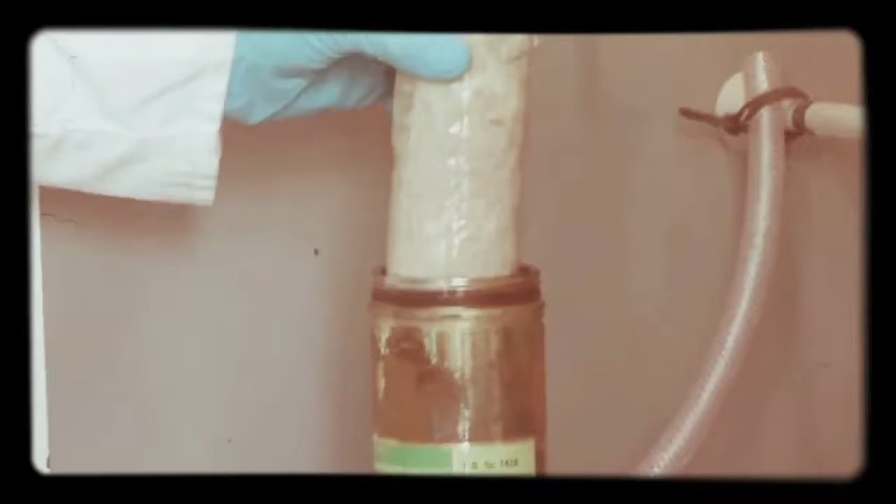It's stored under oil to stop air or moisture getting on it. It reacts very quickly with air and also with water. The hydroxide forms a white crust on the outside, fizzing as it generates lots of hydrogen gas. Now the heat from the reaction is burning away all of that hydrogen.

You don't want to build a reactor out of stuff that wants to burn or react with anything. You want whatever you've made it out of to be at the rock bottom of stability. I don't want there to be a step further down that is chemically favorable, because that's how things burn.

The fast breeder guys use sodium because it doesn't slow down the neutrons. Everybody who was pushing plutonium said, we want a fast reactor. That's the only way to do it.

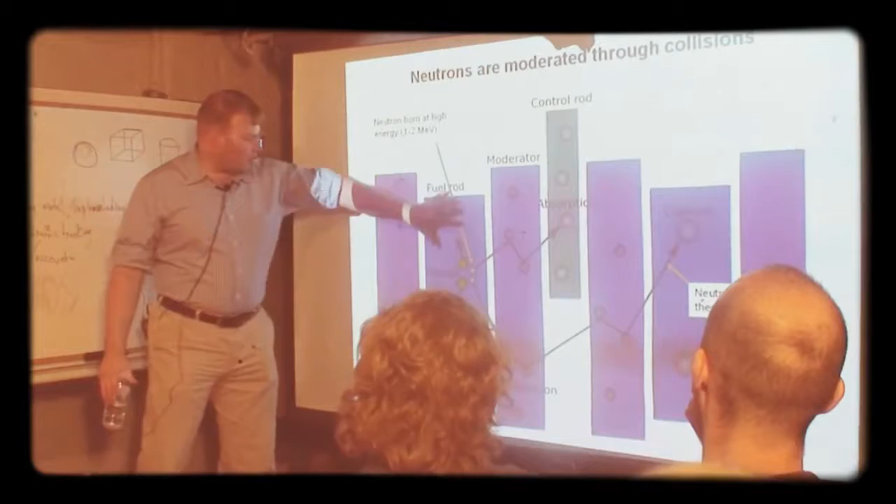The notion of the public being intimately involved in very complicated technical issues, which went way beyond the competence of any member of the public, it just didn't seem that that was the right way to do it. And I think the basic question is, can modern intrusive technology and liberal democracy coexist?

The decision of what is acceptable is not something that we technologists can make. It's something that the public makes.

I think a lot of people were daunted by nuclear energy. There's no way we could learn this stuff. I don't want to do that class, it's going to be too hard.

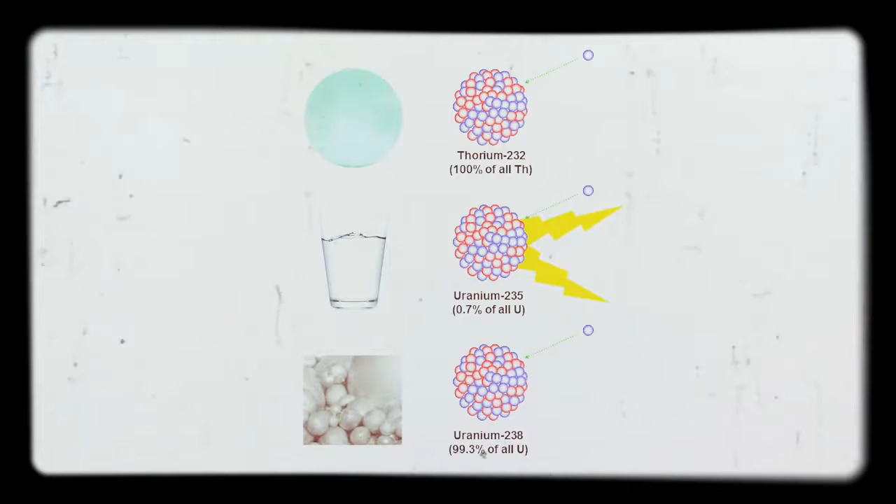These three coolants are generally associated with three different nuclear fuels. Liquid sodium-cooled reactors are fueled by natural uranium. Water-cooled reactors are fueled by enriched uranium. And molten salt reactors can be fueled by thorium.

The reactors deployed commercially around the world are water-cooled. Today, we use water to cool reactors because we use enriched uranium as fuel. And we use enriched uranium as fuel in today's reactors because they are water-cooled.

Despite sodium's reactivity with both air and water, it is in some respects a safer coolant than water. This is because our enriched uranium-fueled, water-cooled reactors pressurize the water to raise its boiling point and drive steam turbines more efficiently. If we didn't pressurize the water, we'd be using much more uranium and producing much more nuclear waste per watt of energy.

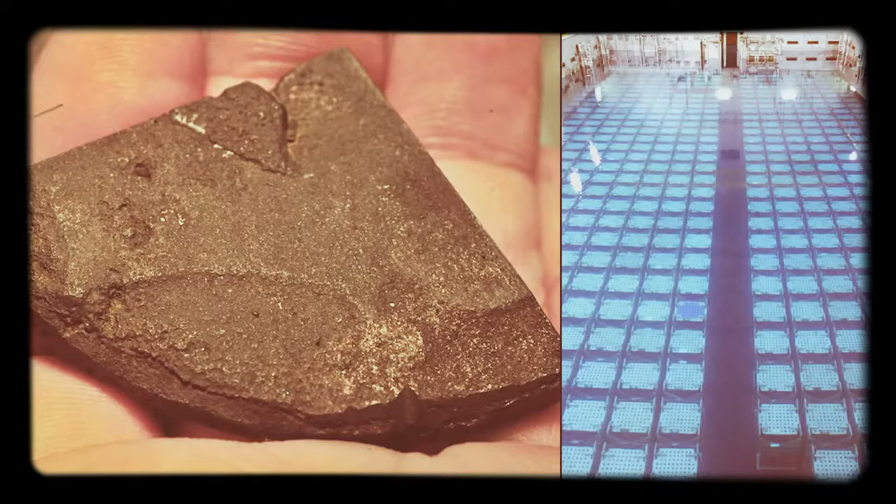In addition to being a thorium guru, Weinberg was also the original inventor of the pressurized water reactor. So it was a little bit of a tricky thing to have the inventor of the light water reactor advocating for something very, very different.

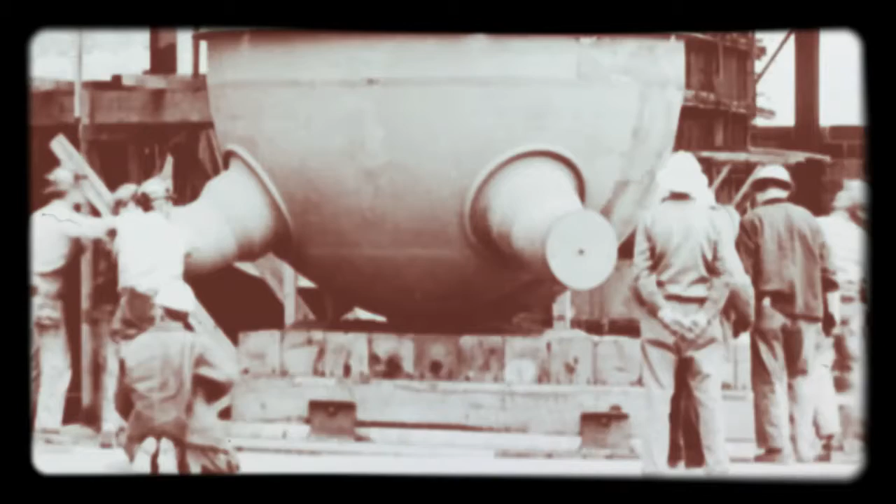As long as the reactor was as small as the submarine intermediate reactor, which was only 60 megawatts, then the containment shell was absolute. It was safe. But when you went to 1,000 megawatt reactors, you could not guarantee this.

Weinberg never really was crazy about the light water reactor. He didn't like the fact that it had to run at really high pressure. He figured there would be an accident someday where you were not able to maintain the pressure or keep cooling it.

In some very remote situation, conceive of the containment being breached by this molten mass. A small valve in this collection of pipes is stuck in an open position, letting steam and water escape from the reactor core. It's critical that the uranium fuel rods that make up the reactor core stay underwater.

A yellow tag covers an important light. They're convinced that the core is covered by water. A huge bubble of hydrogen is forming right inside the reactor vessel.

The hydrogen was generated by reaction between steam and the zirconium fuel cladding. And then that hydrogen ignited from some sparks. Boom! The whole building shudders. I mean, the whole plant building, boom!

And somebody says, what was that? An explosion had taken place inside the containment building, and those gaseous fission products came out and were released to the environment.

Pregnant women and preschool-aged children leave the area within a 5-mile radius. It took a month to shut the reactor down, but finally, Unit 2 was stone cold dead.

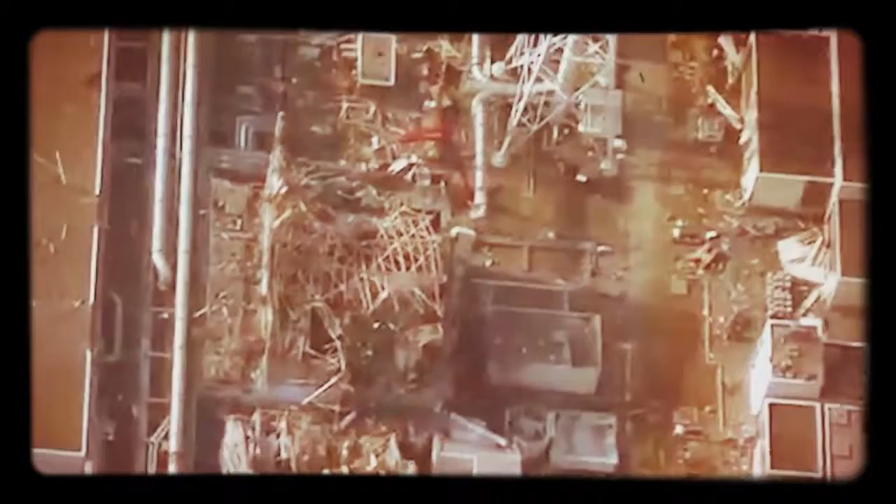The Japanese Prime Minister ordered a desperate tactic: dumping water on the spent fuel pools from the air. Tungsten plates were bolted to the helicopter to protect the pilots from gamma rays, but the wind was too strong for accurate aiming. The Japanese government ordered a team of Tokyo firefighters to park a truck by the sea to suck up water, then lay 800 yards of hose and leave it spraying into the fuel pool.

The route was blocked by tsunami debris. The firefighters now had to lay the hose by hand. After an hour on site, the hoses were finally connected.

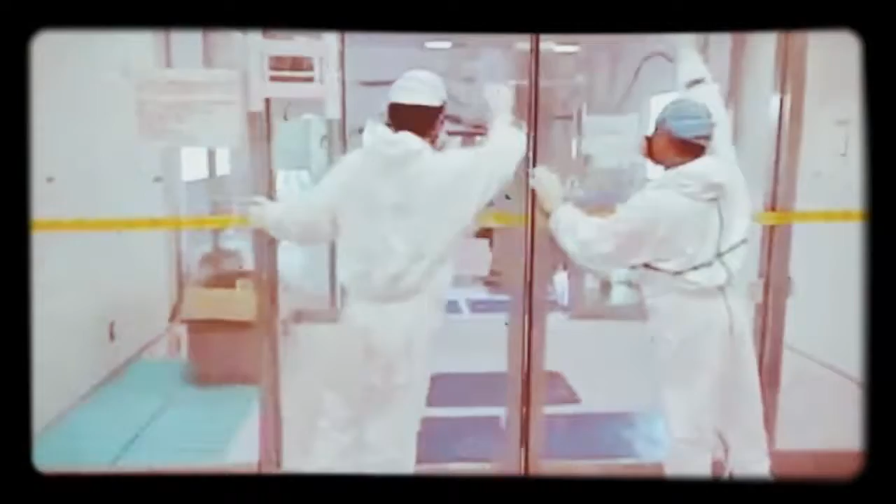Radiation levels at the plant began to fall. The hundreds of workers who'd been on standby headed into the plant to lay miles of pipes. A steady flow of water at last started to cool the reactor cores. The workers in the control center began to feel hope.

3 Mile Island, Chernobyl, and Fukushima were all radically different incidents. What was similar at all three was how poorly water performed as a coolant when things started to go wrong. This is not to say that water coolant caused these accidents to occur—it did not. All three accidents were initiated by different combinations of design and operator error. It was water coolant which allowed these errors to multiply and ultimately result in the escape of radioactive isotopes into the environment.

At 3 Mile Island, water couldn't be pumped into the core because some of the coolant water had vaporized into steam. The increased pressure forced coolant water back out, contributing to a partial meltdown. At Chernobyl, the insertion of poorly designed control rods caused core temperature to skyrocket. The boiling point of the pressurized water coolant was passed and it flashed to steam. It was a steam explosion which tore the 2,000-ton lid off the reactor casing and shot it up through the roof of the building. At Fukushima, loss of power to the pumps allowed coolant water to get hotter and hotter until it boiled away.

These three accidents illustrate the need for a coolant with a higher boiling point than water. It's only got 100 degrees of liquid range, 0 to 100 C. That's not particularly impressive. So to jack up water's liquid range, you have to put it under pressure, because that's the only way to get water to go up to 300 degrees C without turning into steam.

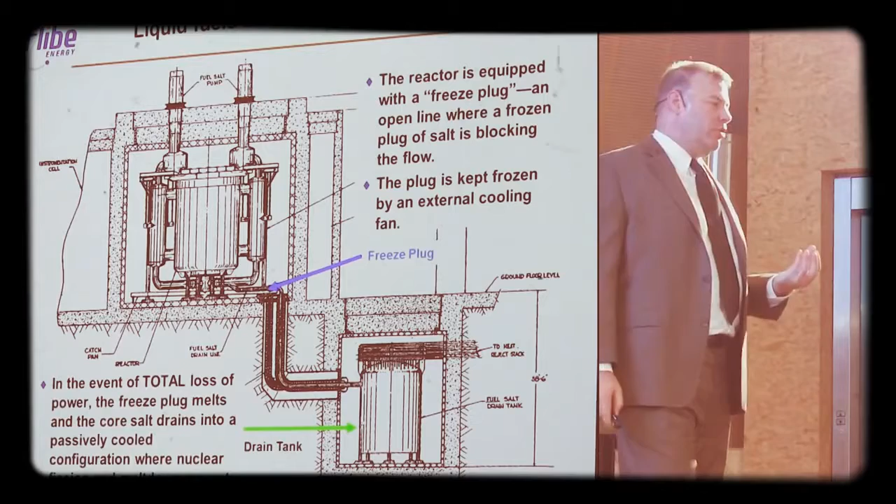And to keep the port plugged, they had a blower that would blow cool gas over it, so there was a little plug of frozen salt there. Well, if the power went out, the blower turned off, and the heat would melt the frozen plug, and the fuel drained into this drain tank. The difference between the drain tank and the reactor vessel was: the reactor vessel was not meant to lose any thermal energy. The only place you wanted to lose thermal energy was to give it up in the primary heat exchanger.

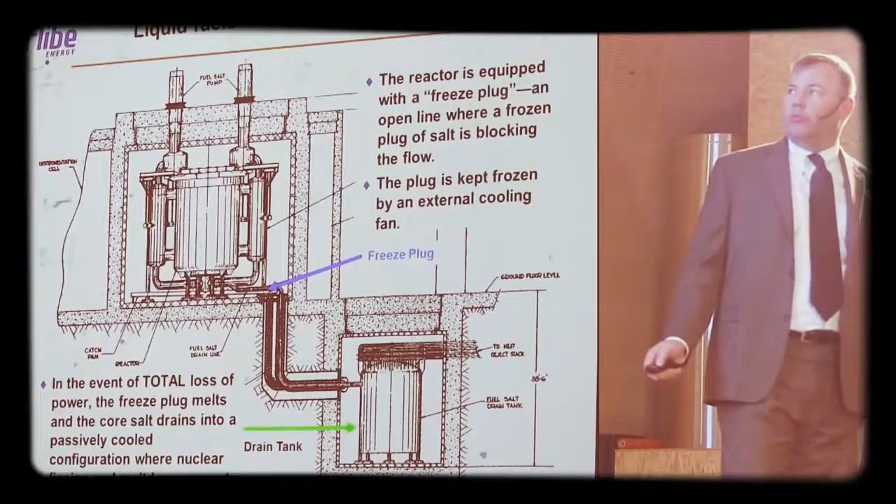The drain tank, on the other hand, is designed to maximize the rejection of thermal energy to the environment. I'm a mechanical engineer, so all we ever talked about in school was how to add heat to things and take heat out of things. One of the hard things about designing a nuclear reactor is designing it to not lose any heat while you're running it, because you don't want to lose a bunch of heat in normal operation, but then to turn around and try to keep it cool if something goes wrong. So there are two conflicting things.

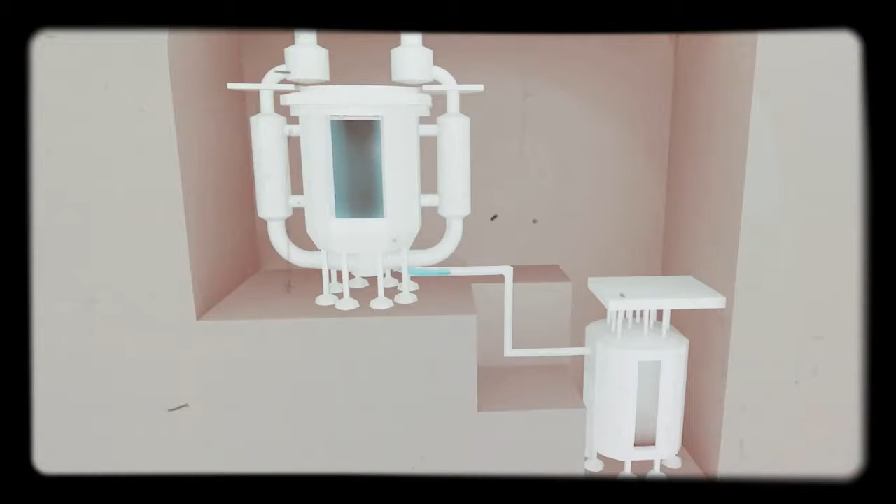The great thing about liquid fluoride reactors is you can design them completely separately. You can say, here's my reactor and it's designed to make heat, and here's my drain tank and it's designed to cool in all situations. Better than having what's called deterministic safety systems or engineered safety systems is to have inherent safety systems that will work 100% of the time, because it is based on the laws of physics. A cooling system that is completely passive, that does not rely at all on electrical power to manage the decay heat after shutdown.

And it's always going to work because gravity is always going to be turned on. Because it was not operating at high pressure, this is a system that was tolerant of extraordinary damage. If you wanted to go in and jam a projectile through the side of the reactor, the salt would still just drain out, now into a pan, but the pan would run back into the drain tanks. Now, in that situation, you're not going to turn the thing right back on again, but it's not going to lead to a dangerous release of radioactivity.

At 3 Mile Island, coolant water which had boiled into steam reacted with the fuel rod cladding to produce hydrogen gas. This led to several explosions. At Fukushima, steam also reacted with the fuel rod cladding to produce hydrogen gas. This led to hydrogen gas explosions at reactors 1, 3, and 4.

Let me diss on water a few more times. It's a covalently bonded substance. The oxygen has a covalent bond with two hydrogens. Well, neither one of those bonds is strong enough to survive getting smacked around by a gamma or a neutron. And sure enough, they knock the hydrogens clean off.

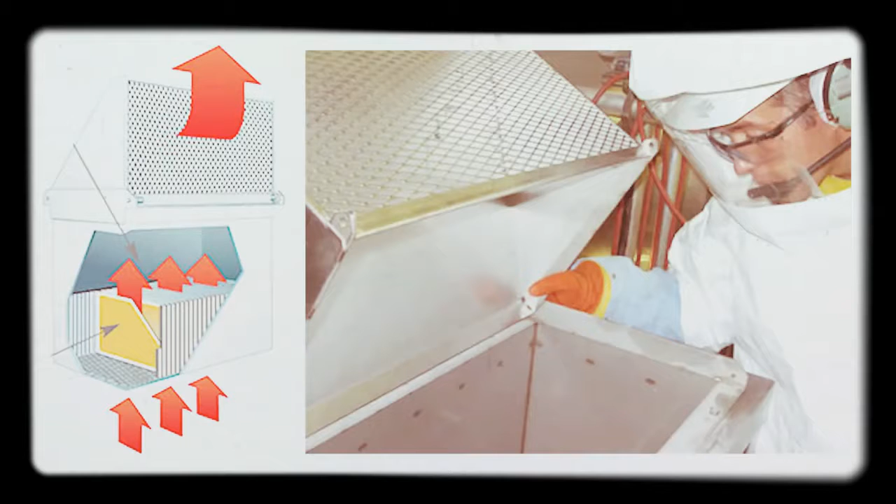In a water-cooled reactor, you have a system called a recombiner that takes the hydrogen gas and oxygen gas that's always being created from the nuclear reaction and puts them back together. It's a great system as long as it's operating and the system is pumping. At Fukushima Daiichi, the problem was the pumping power stopped. H2O can also react with the fuel cladding to release hydrogen and damage the cladding, releasing radioactive isotopes.

These two accidents illustrate the need for a coolant which is more chemically stable than H2O. A nuclear reactor is a rough place for normal matter.

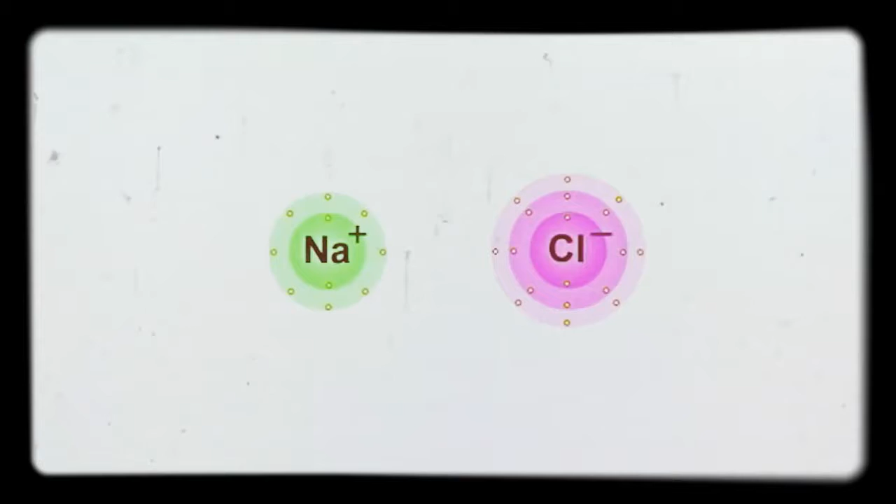The nice thing about a salt is it's formed from a positive ion and a negative ion. Like sodium's positively charged and chlorine's negatively charged, and they go, we're not really going to bond, we're just going to kind of associate one with another. And that's what's called an ionic bond. You're kind of friends - Facebook friends.

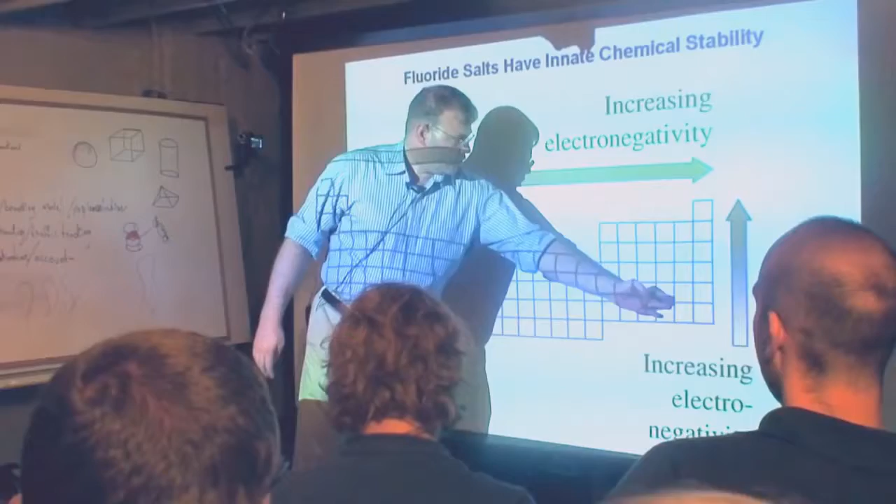This turns out to be a really good thing for a reactor because a reactor is going to take those guys and smack them all over the place with gammas and neutrons and everything. The good news is they don't really care who they're particularly next to. As long as there's an equal number of positive ions and negative ions, the big picture is happy. A salt is composed of the stuff in the halogens column, and the stuff in the alkalis and alkaline earths columns.

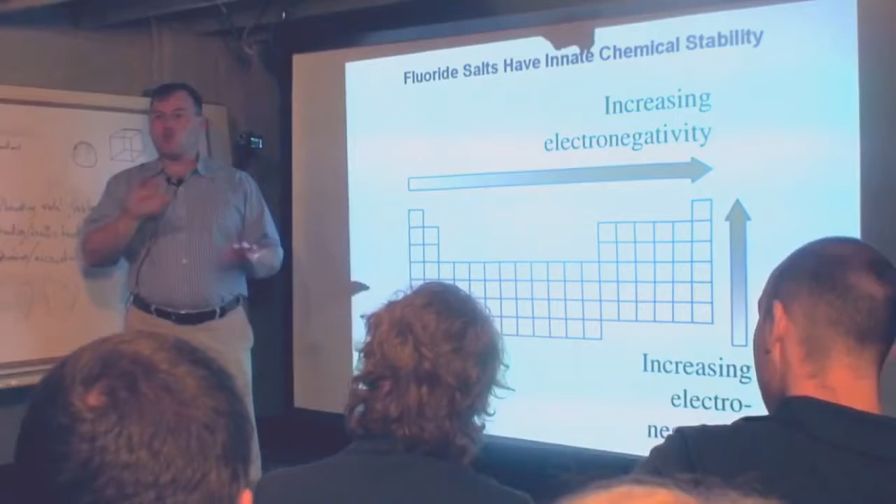Fluorine is so reactive with everything, but once it's made a salt, a fluoride, then it's incredibly chemically stable and non-reactive. Sometimes people go, oh, you're working on liquid fluorine reactors. No, I am not working on liquid fluorine reactors. We're working on fluoride reactors, and there's a big difference between those two. One is going to explode, the other one is super duper stable.

I see moving to molten salt fueled reactor technology as a way to get rid of all the stored energy term problems that we look at in today's reactors, whether it's pressure, chemical reactivity, or even the potential of the fission products in the fuel itself to be released.

In fluoride fuel, which is what we would use in a molten salt reactor, those fission products are bound up very tightly in salts. Strontium and cesium are both bound up in very, very stable fluoride salts. Cesium fluoride, very stable salt. Strontium difluoride, another very stable salt.

In light water reactors, cesium is volatile in the chemical state of the oxide fuel, and that's been one of the concerns about cesium release. Cesium would not release from a fluoride reactor at all.

So why are we using water to cool today's reactors? If water coolant prohibits us from completely consuming uranium or thorium as fuel, why did we start using it in the first place? The association between different nuclear fuels and their respective coolants is because some nuclear fuel requires slow neutrons and some nuclear fuel requires fast.

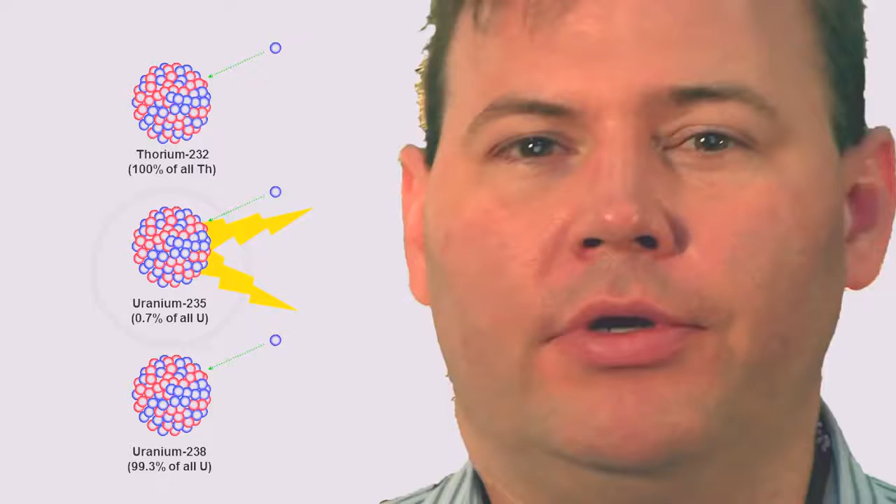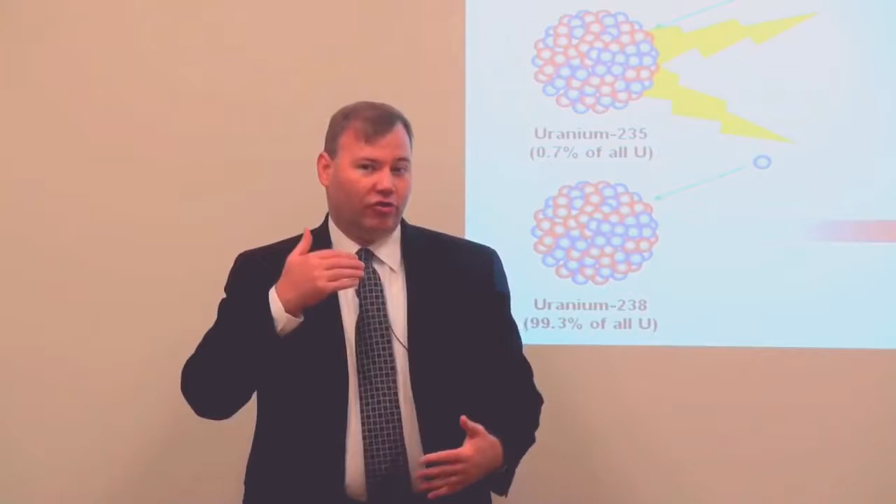There really were three options for nuclear energy at the dawn of the nuclear era. Only one of the materials in nature is naturally fissile, and that's uranium-235, which is a very small amount of natural uranium, about 0.7%. This was the form of uranium that could be utilized directly in a nuclear reactor. Most of the uranium was uranium-238. This had to be transformed into another nuclear fuel called plutonium before it could be used.

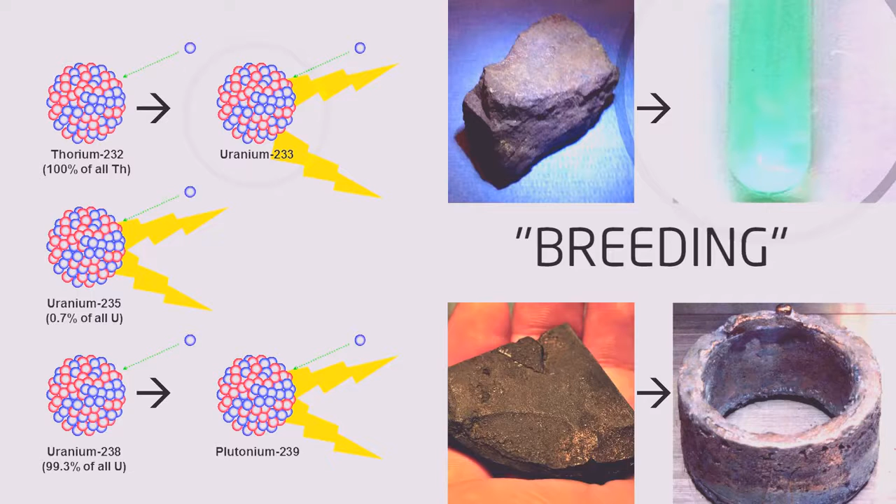And then there was thorium. In a similar manner to uranium-238, it also had to be transformed into another nuclear fuel, uranium-233, before it could be used in a reactor.

Well, this was wartime. Their plan was to make bombs. They took natural uranium and separated those two isotopes. They would highly enrich uranium-235 from less than 1% up to 90+%. It took big factories - it's very difficult to do isotopic enrichment. But this is how they made the uranium for the first nuclear weapon used in war.

This was the bomb at Hiroshima. It was called Little Boy. Then they said, well, what can we do with all this junk uranium-238, the 99.3% of it?

You could expose it to neutrons, and you could make it into plutonium. Now, plutonium is a different chemical element than uranium, so they can be chemically separated. Uranium-235 and uranium-238 are chemically identical - there's no chemical difference between them. But there is a chemical difference between plutonium and uranium, so it was a lot easier to do a chemical separation of the plutonium you'd made, and that's how they made the Nagasaki bomb, which was called Fat Man.

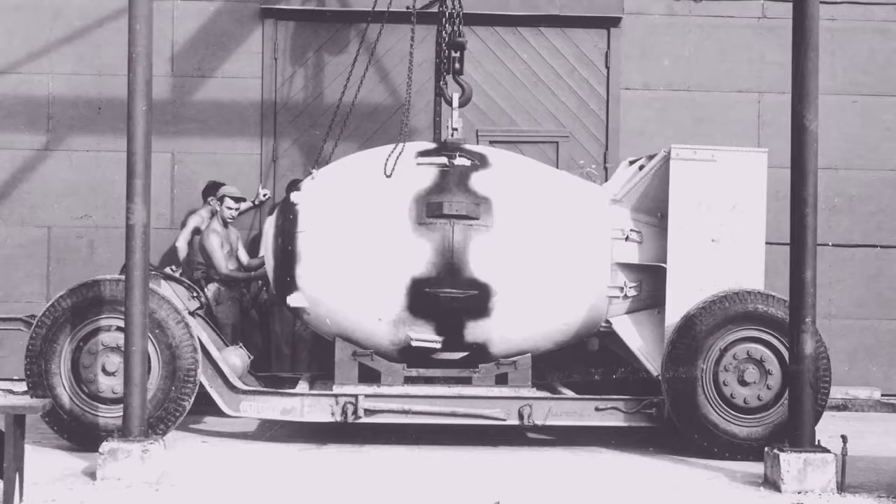Okay, well maybe we can do the same thing with thorium. Maybe we can expose it to neutrons and make it into uranium-233. Uranium will be chemically separable from thorium, and we can go make a bomb out of it, right? Sounds great. It's a really bad idea, because as you made the uranium-233, you were always making uranium-232. You didn't make a lot of it, just a little bit of it.

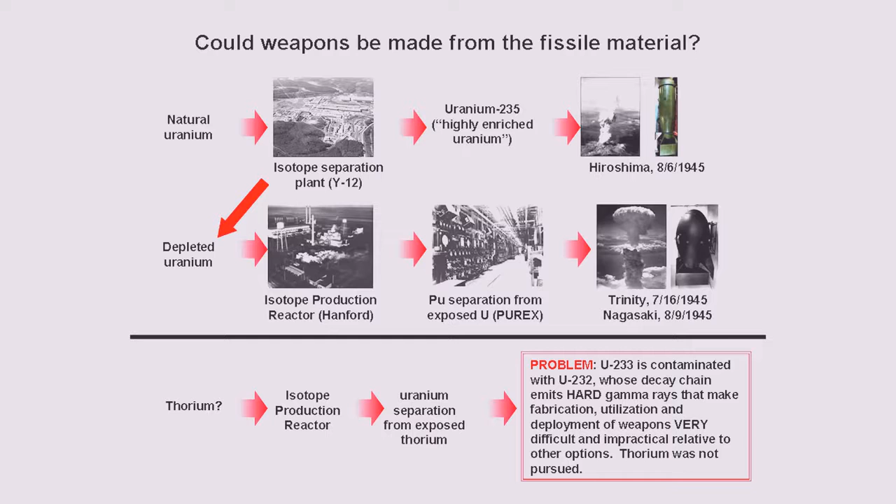But uranium-232 is much more radioactive than uranium-233. Here's the decay chain that uranium-232 is on: it jumps down to bismuth-212 and thallium-208, and these two decay products put out very strong gamma rays. These gamma rays are super bad news if you want to build a practical nuclear device, because they tell everybody where the stuff is and they kill you. So quickly they decided: we can work with uranium-235, that seems okay. We can work with plutonium, that seems okay. But this uranium-233 stuff, that's bad news for making a nuclear weapon. So thorium was just set aside.

Well, after the war, they picked up on this again because now they were thinking, let's talk about making power instead of making nuclear weapons.

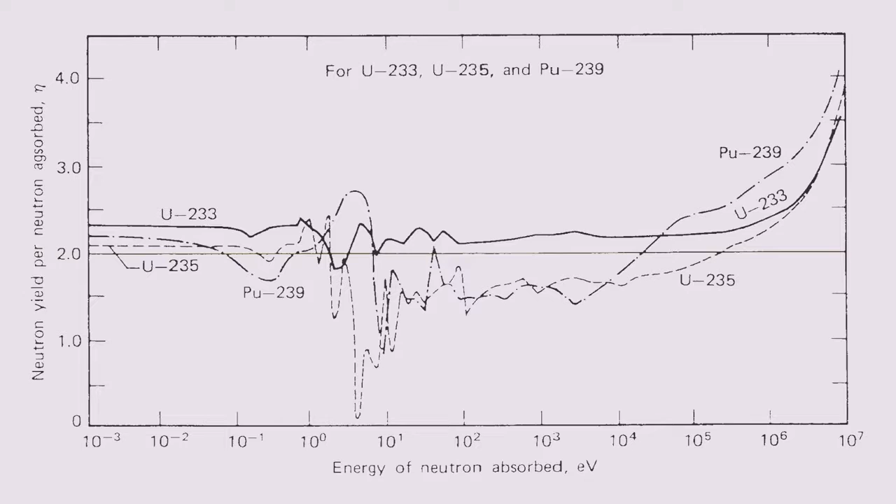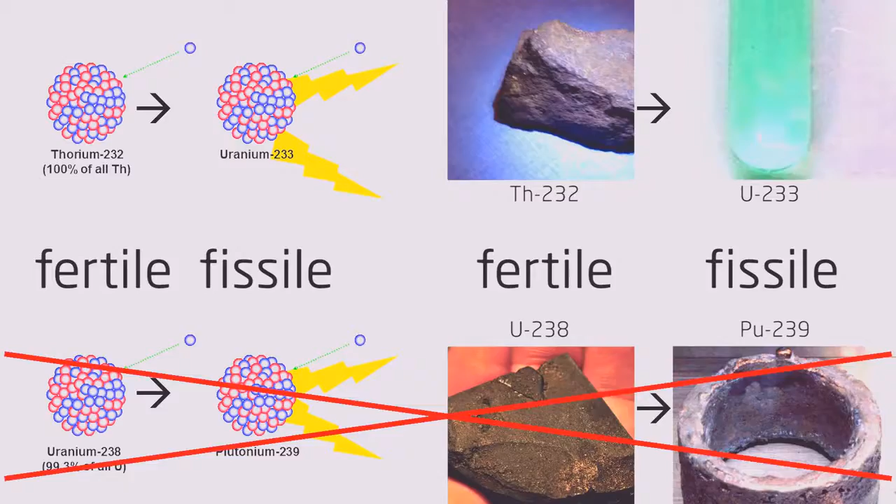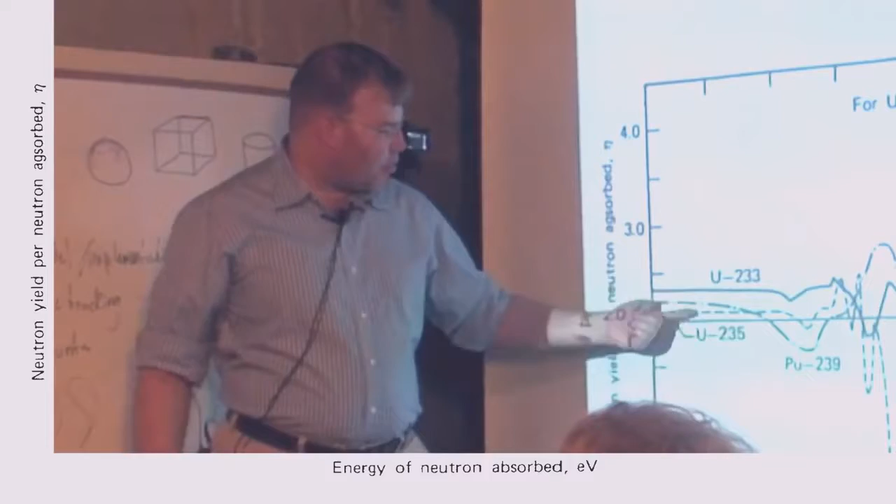2 is a very significant number in breeder reactors. You need 2 neutrons: you've got to have 1 to keep your process going, and you have to have another one to convert fertile material into fissile material. Look at plutonium, it's that dip below 2 right there. That's what makes it so you cannot burn up uranium-238 in a thermal spectrum reactor, like a water-cooled reactor. You just can't do it, the physics are against you. And the reality is you do lose some neutrons, you can't build a perfect reactor that doesn't lose any. So they looked at this and said, man, we just can't burn uranium-238 in a thermal reactor. It just can't be done.

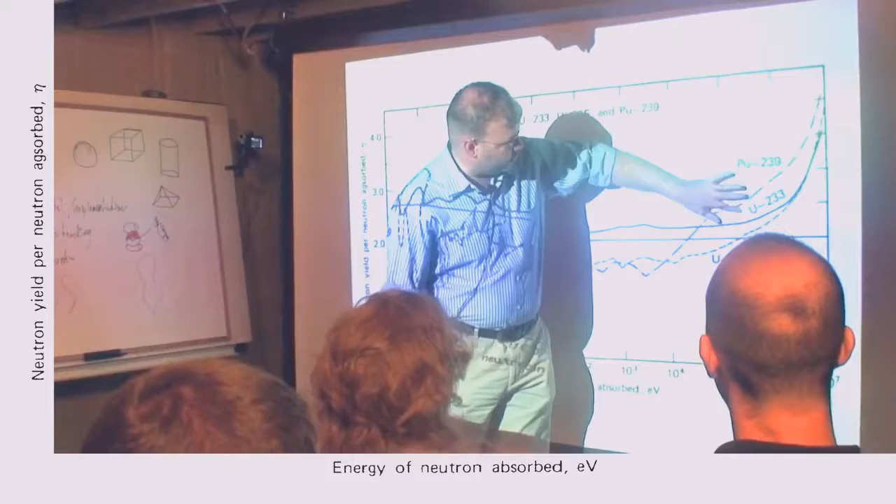Well, you know, these guys are undeterred. They said, well, here's what we'll do: we'll just build a fast reactor, because look how good it gets in the fast region. Wow, it gets above 2. In fact, it gets to 3. Wow, this is really good.

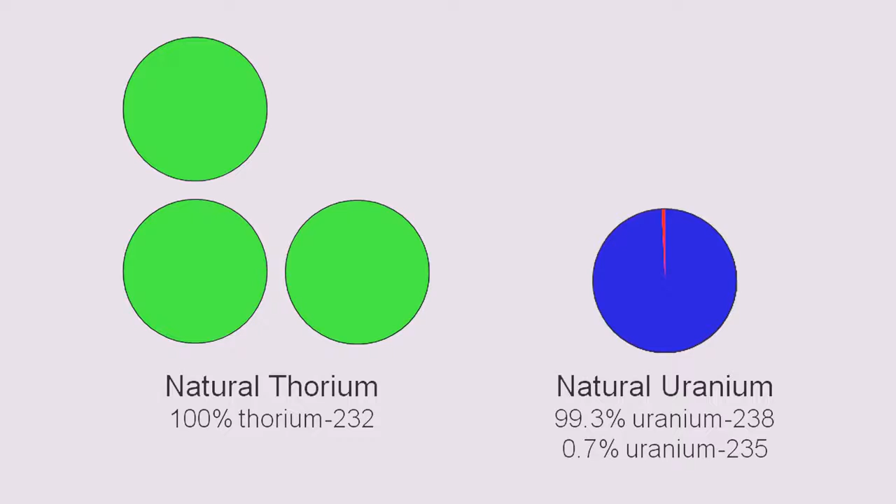Okay, this is the fast region, this is the thermal region. Thorium is more abundant than uranium - all we're consuming now is that very, very small sliver of natural uranium. But this is not the big deal. No, it's not a big deal that natural thorium is hundreds of times more abundant than the very small sliver of fissile uranium. The big deal about thorium is that we can consume it in a thermal spectrum. That's the big deal of thorium, that it can be consumed in a thermal spectrum reactor.

When you're talking about a thermal spectrum reactor of any kind, you have to have fuel and you have to have moderator, and they're both essential to the operation of the reactor. The moderator is slowing down the neutrons, and when the neutrons have been slowed down, we call them thermal neutrons, or a thermal spectrum. In a water-cooled reactor, we use water, specifically the hydrogen in the water, to slow down the neutrons through collisions.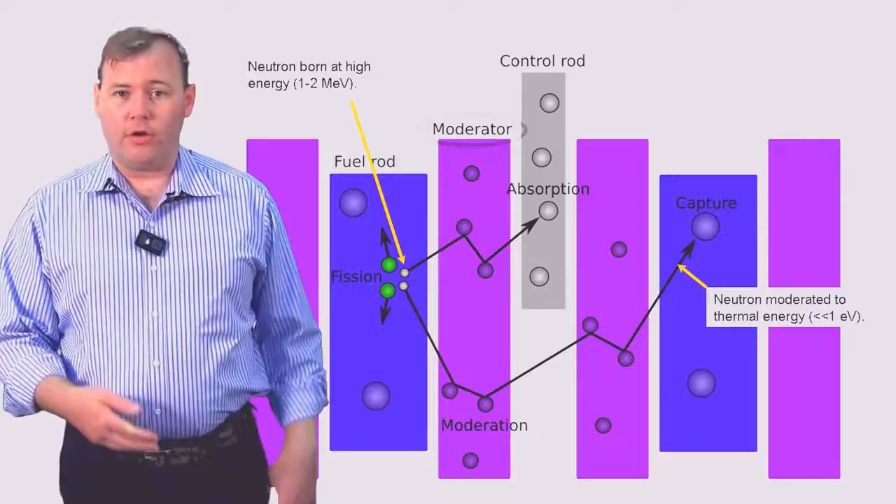The graphite in the molten salt reactor, is that a moderator? Yes, that's the moderator in the reactor - same idea, except we use graphite as the moderator instead of water. Neutrons go in the graphite, hit the carbon atoms, they lose energy, they slow down. Now why slow it down? That's the difference when you're going from that little bitty dot to the big dot. That's why you want to slow it down - you want the big dot, not the little bitty dot.

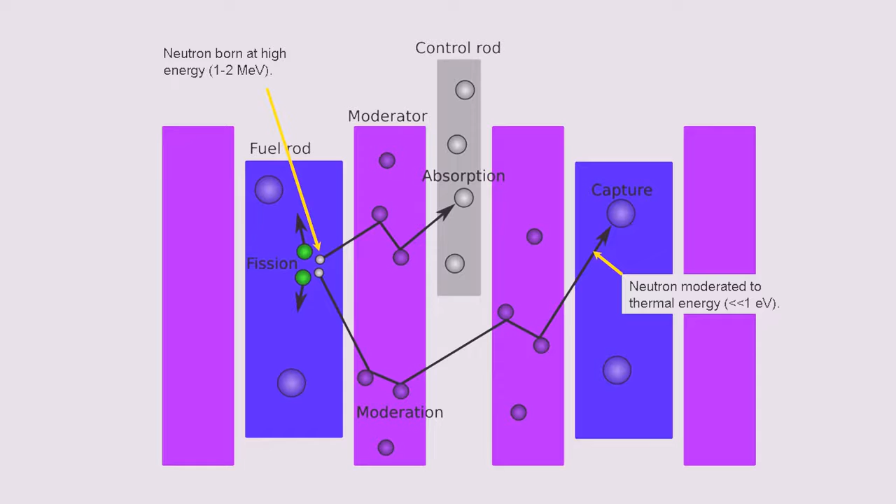A thermal spectrum molten salt reactor has to have the graphite moderator of the core in order to sustain criticality. If the vessel ruptures, recriticality is fundamentally impossible - the drain tank does not have any graphite in it.

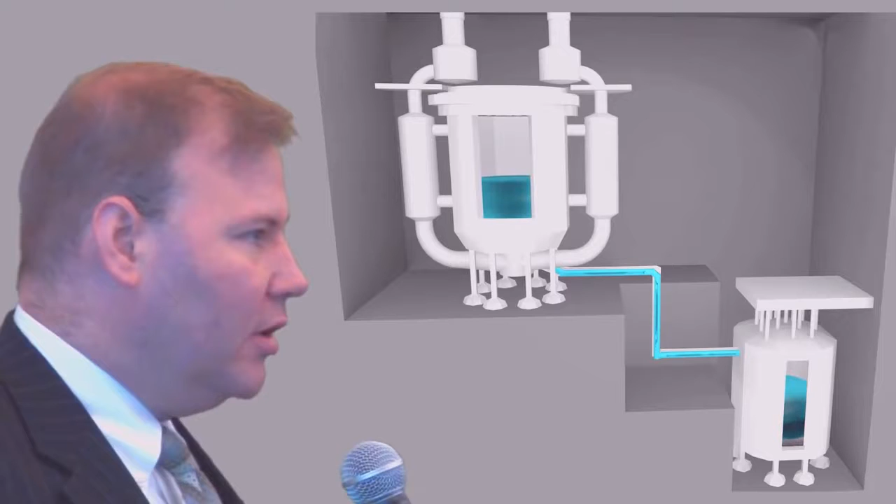If something happens where fuel drains away from that graphite, criticality is no longer possible. The reactor's subcritical, fission stops, and there's no way to restart it without reloading the fuel back into the core. This is such a remarkable feature, unique to having this liquid fuel form and something that can operate at standard pressure. You can't do this in solid fuel. If you do this in solid fuel, it's called a meltdown.

That's bad. Now, in a fast reactor, on the other hand, you don't depend on moderator. You put enough fuel in the reactor so criticality is possible even without moderator. In those scenarios, if there's a drain or a spill, you need to be careful about what geometries it could get into, because recriticality is not, from first principles, impossible. It may be impossible in the design you've designed, but that becomes design specific. Whereas in a thermal reactor, it is just impossible. Outside of the lattice of moderator, you can't have a criticality set up.

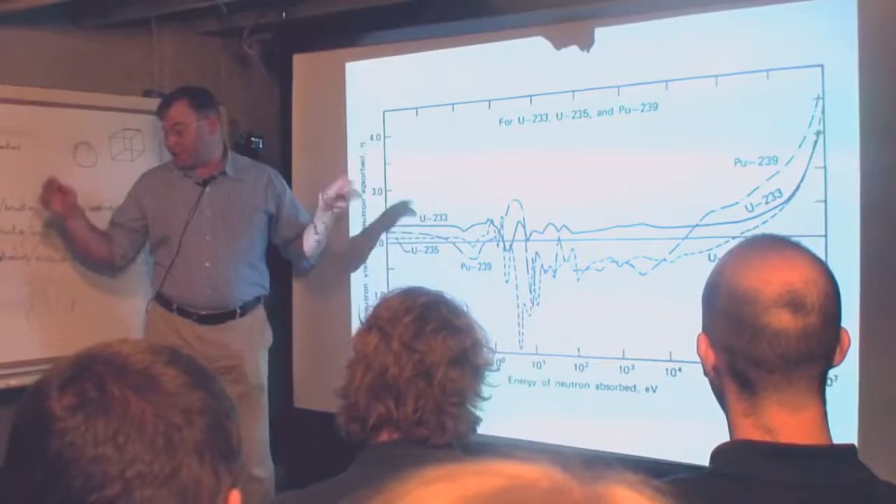This fact was not well known probably until about the 70s. There was some data that indicated it, but there was enough uncertainty even as late as 1969 that the Atomic Energy Commission did not feel it was a safe bet to go with thorium. Everybody who was pushing thorium said, we like thermal, this is the kind of reactor we want to build. And everybody who was pushing plutonium said, no, we want a fast reactor, that's the only way to do it. And so what happened is they put resources into the plutonium breeder reactor almost from the get-go.

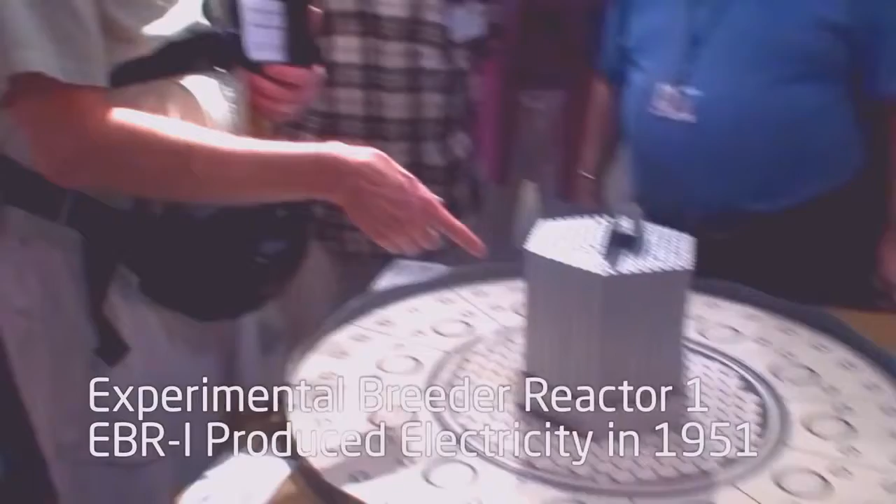They built the Experimental Breeder Reactor 1 in 1951. This was the first reactor that made electricity, powering 4 little light bulbs. This is a mock-up of the core. This size was giving off a megawatt of thermal energy. How tall is this? 8 inches. Is this actual size? Yes, that's full size.

The EBR-1. This was a breeder reactor. It was designed to convert plutonium into energy while making new plutonium. This was not a light water reactor, it predated the light water reactor by years. It was a fast breeder. This is 1951, and this is essentially a Gen 4 reactor.

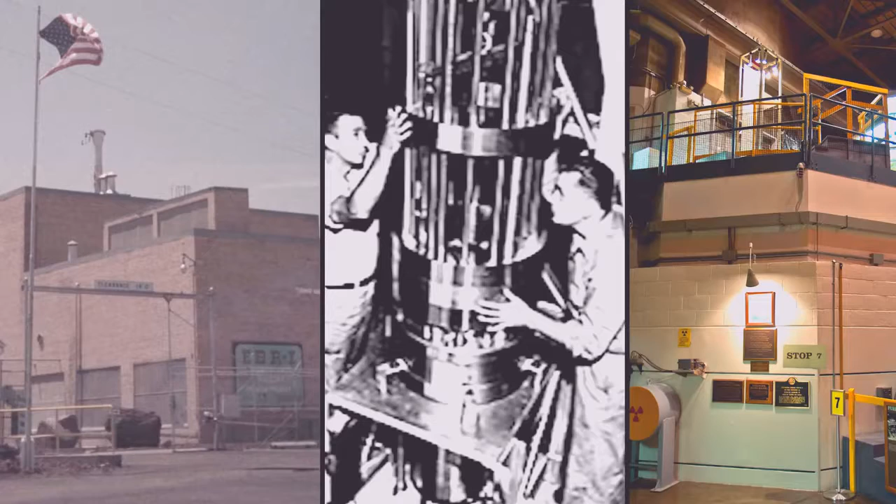No kidding. Early nuclear pioneers like Enrico Fermi and Eugene Wigner saw the future quite a bit differently. Fermi believed that because of the performance of plutonium, and especially because it could have a substantial breeding gain—in other words, it could make more fissile material than it was consuming—we should really focus our efforts on the fast breeder reactor. Eugene Wigner, on the other hand, looked at these same pieces of information and reached a different conclusion, which was that thorium was a superior fuel and should be realized in a thermal spectrum, in a thermal breeder reactor.

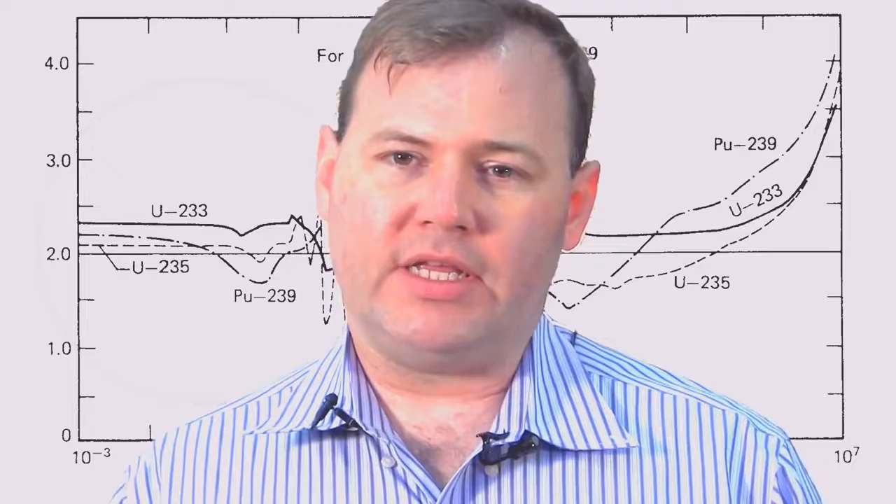And this opened up a number of possibilities with coolants and reactor configurations. But thorium, in another way, was a rather unforgiving fuel. It did not have a great breeding gain like plutonium had the potential for in the fast spectrum. You had to be very careful and conserving of your neutrons. You couldn't waste a lot on losing neutrons to structural materials, or losing them to leaks out of the reactor, or losing them to absorptions in the daughter products of fission.

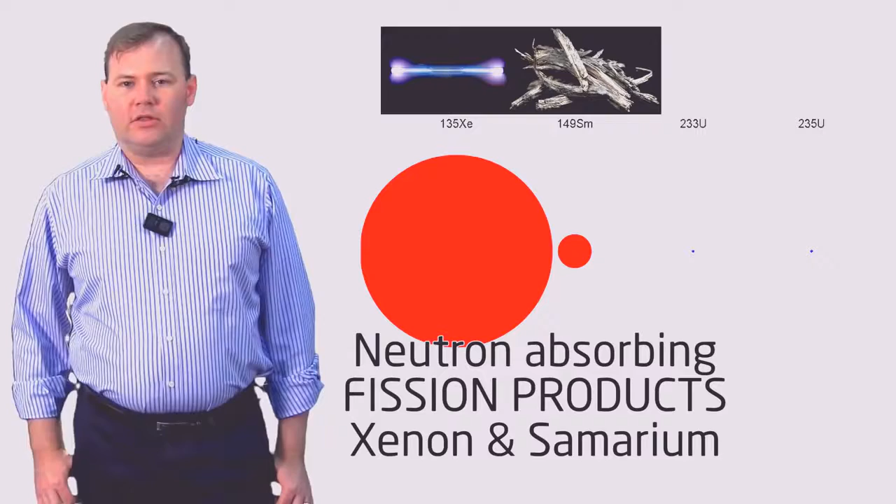And thorium also had another challenge. It took about 27 days once it absorbed a neutron to turn into uranium-233. There was a time delay between when it absorbed a neutron and when it became new fuel. Fermi wondered how thorium would overcome this problem of the delay from when it absorbed a neutron to when it became new fuel. And Wigner had already seen a possible path forward, which was to do something rather revolutionary.

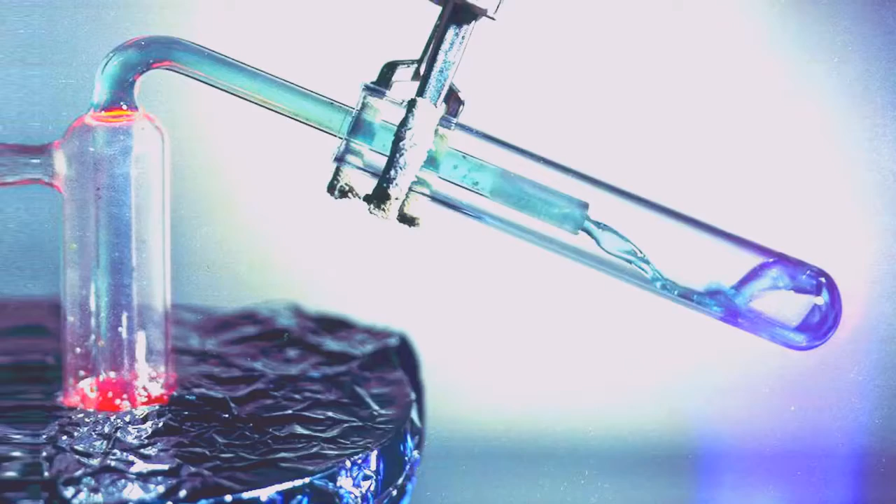Build a nuclear reactor out of liquid fuels rather than out of solid fuels. I believe part of this came from Wigner's educational background. He was the only person, or almost the only person, who combined great skill as a nuclear physicist with great skill as an engineer. Wigner, of course, was a chemical engineer by training, and he was the only one who commanded both of those attributes. So he was able to see both the engineering and physics aspects. He knew that in chemical processes, the reactant streams are almost always liquids and gases.

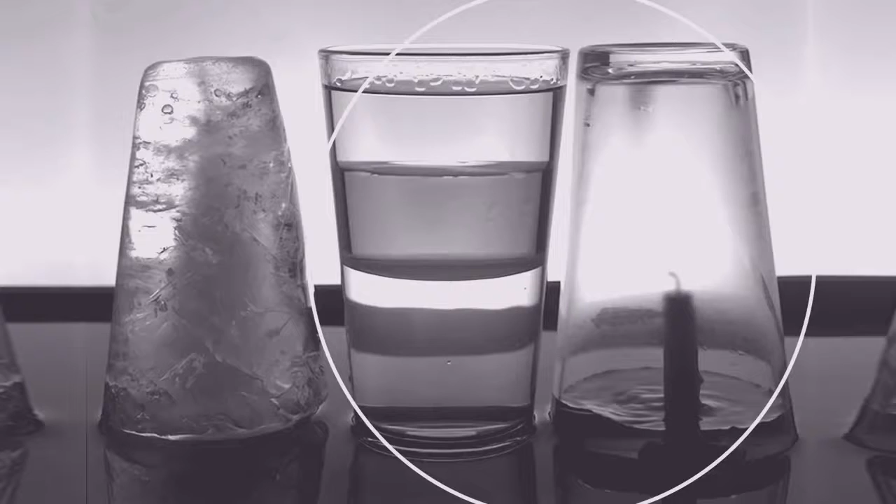They're fluids, and in fluids complete mixing is possible, allowing completion of various chemical reactions. He looked at the nuclear problem and wondered if the same principle might apply. With a fluid-fueled reactor, it would be possible to isolate protactinium-233 as it was formed and allow it to decay, preventing it from being destroyed before it could complete its transition to uranium-233.

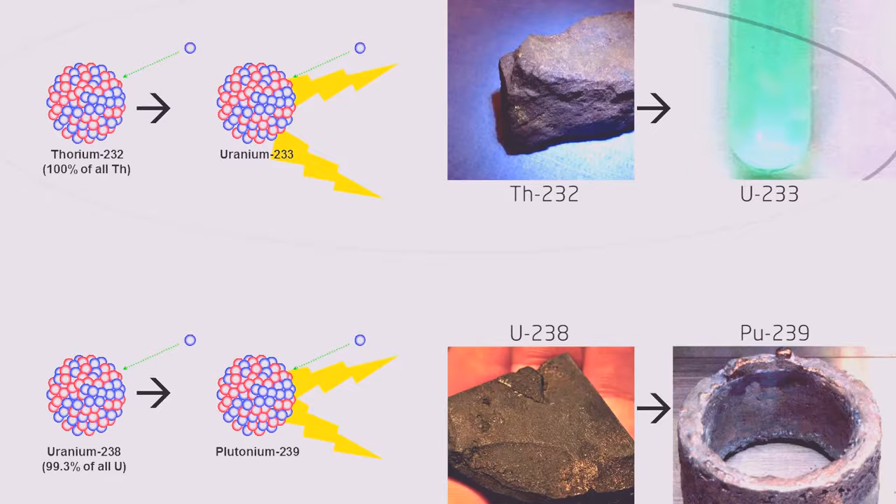Wigner was not successful in convincing the bulk of the nuclear community to take the thorium approach. They by and large said we're going to go the plutonium route. One reason was they had developed a great deal of understanding about plutonium from the weapons program. They had made the stuff, worked with its chemistry, made fuel out of it. They said, we get this. Thorium, we haven't really messed with thorium - it would be like starting over. So there was a propensity to go do what you already knew how to do, and plutonium was so much better developed than thorium. So Wigner was not terribly successful in making converts in the nuclear community.

But he did make one convert, this guy, Alvin Weinberg. He was his student during the Manhattan Project. Of course I had heard about Eugene Wigner as this great, wonderful physicist. I gradually became his assistant in charge of the nuclear design. And Weinberg got it - he got the big picture. He understood we need thorium, we need a thermal reactor, we need liquid fuel. I see it, I see what we've got to do.

We visited with Mr. Rosenthal after we met with you. He spent time in Washington, D.C. with Milt Shaw, and Milt actually had quite an affinity for Knoxville and Oak Ridge. But he wanted Alvin Weinberg and Oak Ridge to get on the fast breeder funding wagon, while Weinberg wanted to stay on with thorium and molten salt.

Well, it was pretty obvious that Shaw was completely convinced the LMFBR, with its sodium-cooled system, was going to be successful. If we have a winner here, why spend money on what we know is going to be the loser? So everyone was just euphoric about the idea of the fast breeder - well, that's the way it appeared to me.

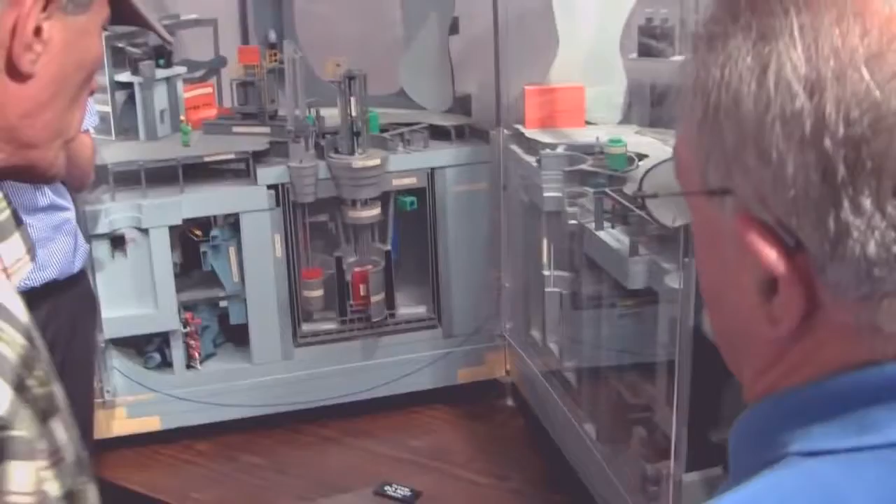This loss of heat sink test would be turning off the power to the secondary, so you're not drawing the heat out of the core. You would shut down the tertiary, the water system. And so this other one, loss of flow test, is that shutting down the intermediate?

The loss of flow test is shutting off the pump, just turning off the primary pump in here, the pump for the primary sodium. It turns off the pump that's somewhere in there. So these two tests are turning off the primary and turning off the tertiary.

But at all times, the core was still bathed in sodium. The sodium's there the whole time. The only thing you're doing is you're also doing it without scram, without control rods going in.

This gets so warm, the fuel assemblies expand, the pins lengthen, they expand sideways, pressurizing up against the core rigidity structure. Achieving a strongly negative temperature coefficient in a fast reactor is a much more challenging proposition, but it's easier to do in a thermal spectrum reactor. There's a lot of options, and a lot of those options are connected with the process of moderating neutrons. So you change something about that process and it helps you achieve a strongly negative temperature coefficient.

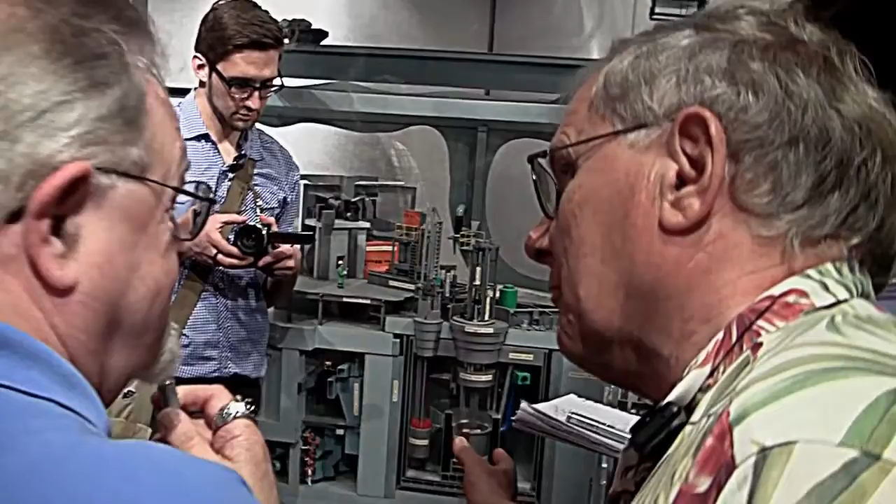The fuel expands, the clad expands, the fuel assemblies expand, the core support structure expands, the core plate underneath expands. This is at the molecular level in the salt reactor because it expands. The salt expands. I wanted to get the same thing, except this is done at the physical level, and so in the salt it's easier to have this happen. That's why I wanted to drill down and get some questions answered. But great, that was very informative.

The trouble is these tests were done about two weeks before Chernobyl. Yes, that's right. That was so amazing. No one even knew about this, which is a shame.

So my question was, this was not commercialized, right? We were going to. It was called Clinch River. I was working on Clinch River, and then Al Gore, who thought that plutonium is nasty, wicked, and evil, and we shouldn't have anything to do with it, persuaded Clinton to shut the program down. I've actually been to the site where the Clinch River fast breeder was supposed to be built. I hopped the fence and trespassed on federal property and walked out to the river, and it's an empty field. The country thought the liquid metal fast breeder reactor was going to be the future.

We've now done three of them. Two have had unintentional core melts. The last one happened in 1966, where the plant manager had to call the mayor of Detroit and say, prepare to evacuate Detroit. Well, how is that Detroit reactor different from here? The Enrico Fermi fast breeder reactor was built by Detroit Edison, made with metallic fuel like this. Actually, it went online about the same time as this one.

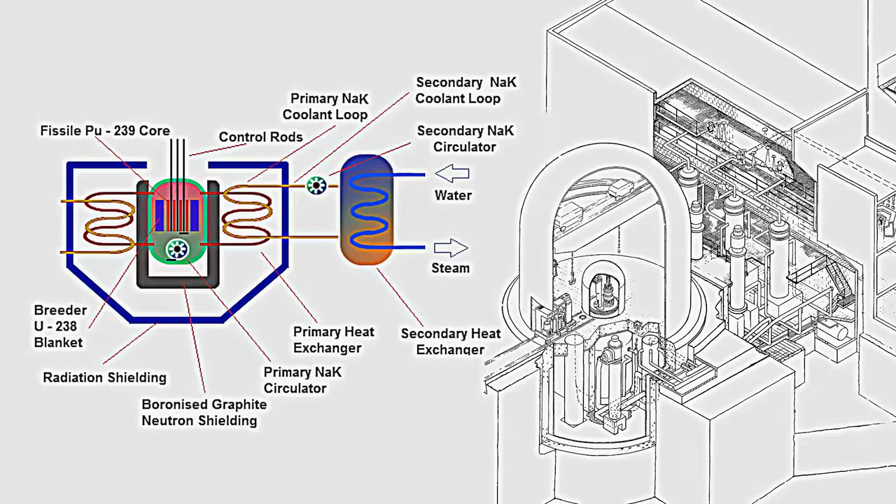The AEC said, well, what happens if you get a meltdown? So they said, okay, we'll put some zirconium plates underneath. The trouble is, when they put them in, they only tack welded them, and the vibration tore one of them off and it went up and flattened underneath, blocked off the sodium. So there's a significant meltdown, but they cleaned it all up.

Milt Shaw, insisting on oxide fuel for Clinch River, wouldn't help give them some money to buy another core load. For want of a couple of million dollars, the plant went down. Unbelievable. Good old Shaw, he's the guy who really is responsible for our trouble.

Milt Shaw is quite infamous in the molten salt community. I had no idea until I read Plentiful Energy. Milt Shaw is infamous to the IFR crowd as well. Boy, he was just infamous to everybody. The folks who were in support of the Clinch River fast breeder reactor had very sharp elbows. Guys who were working on the integral fast reactor have just as much heartache with the focus on the oxide-fueled loop reactor at Clinch River as you do.

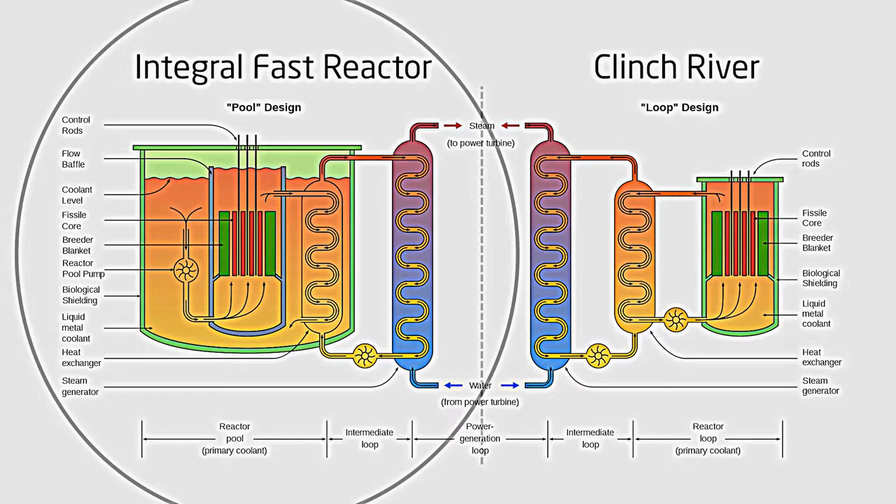Making solid nuclear fuel is a complicated process, and we extract less than 1% of the energy from the nuclear fuel before it can no longer remain in the reactor. Kirk makes a big deal about the fact that he wants to use thorium because it's 200 times better than using uranium, but using uranium is about 10,000 times better than using oil. So let's make the big jump first.

The nukes, though, need to stop fighting amongst each other and compare their power plants to the real competition that holds 85% of the market, which is the fossil fuel companies.

Nobody saw the light water reactor as the machine on which we would power our civilization using nuclear power for thousands of years. The only question is which breeder and how fast do we get to it?

I've got a 1962 report to the president, and right in there it states this is a stopgap technology. I think these early nuclear pioneers would be absolutely floored to show up today in our nuclear world and go, oh my gosh, you're still using light water reactors? I mean, come on, guys. We should have seen more technology advancement by now. We should have seen something better.

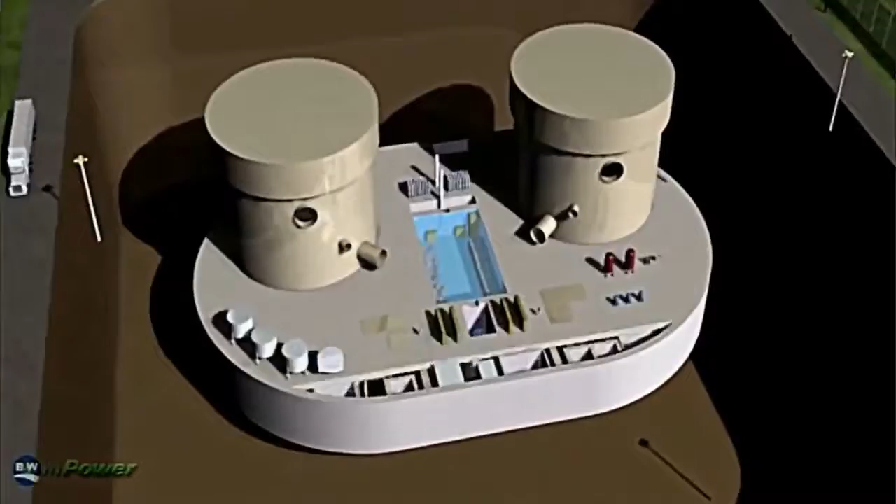Pressurized water reactor has to take 2,000 psi, which is a really thick pipe - typically 4 to 8 inches depending on the diameter of the pipe. We're doing new things with light water. The core, the pumps, the control rod drive mechanisms, the steam generators, the pressurizer, all in one steel pressure vessel, with no piping penetrations in excess of about 3 inches in diameter.

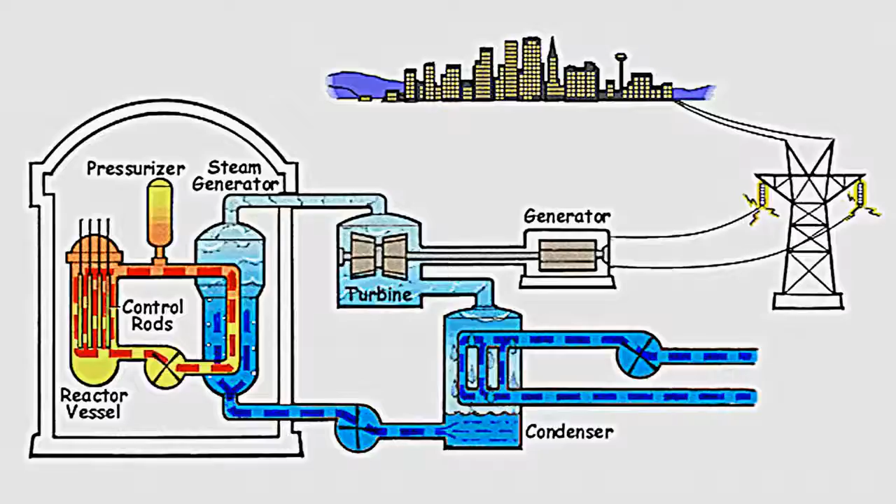I'm working on that exact reactor. The light water reactor is still the most efficient, safest energy source we have on the planet right now. And it's a real thing, and we have a big worldwide fleet of these things. It should have been bigger, but we have like 400 some reactors running.

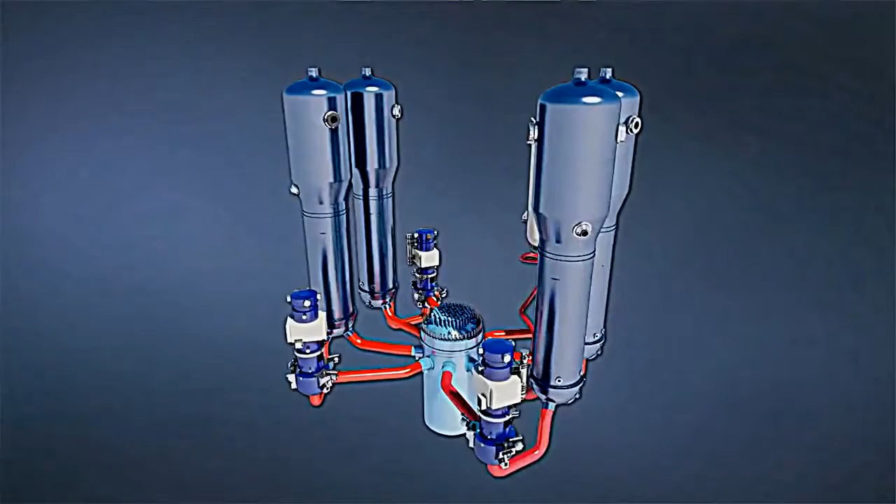All we are saying is that in the very near future, we could have something that's even yet safer and even yet more efficient. If someone said, well, all you can have are water-cooled reactors of some type or a vast array of fossil fuel and so-called renewable energy, I'd rather all my energy was created by light water reactors any day.

Nuclear right now means water-cooled reactor, uranium oxide solid fuel, poor fuel efficiency, and steam turbine. That's what nuclear power means right now. How do you tell people this isn't your father's nuclear, or this is different? It's a much better way to utilize our resources in every way.

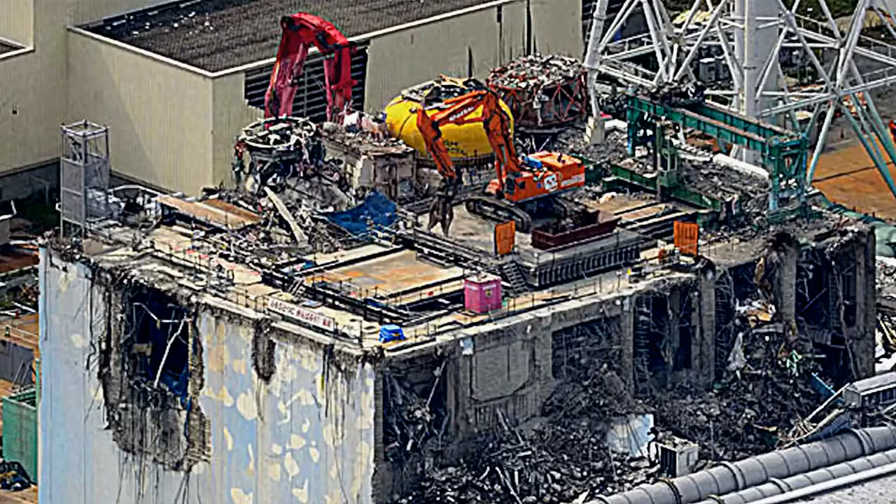Molten salt reactors reignited my passion in nuclear because to me it solves the waste problem. People look at Fukushima Daiichi and they go, is this the end of nuclear power? And I go, no, it's not the end of nuclear power. There's a zillion other ways to do nuclear power. I think this is the best way.

Maybe I'm wrong, though. Maybe there's a better way. I've been looking for it. I tell anybody, I've got a standing invitation - you can figure out how to do this better, I will be happy to go do whatever it is that's better. I'm always looking for it.

Show me a system that is superior to a molten salt reactor, and I'll say, yeah. But to this day, there isn't one. It's not based on nothing - people have spent their careers and done many, many successful long-term tests. This is not a theoretical technology. This is a proven technology that just needs to be commercialized.

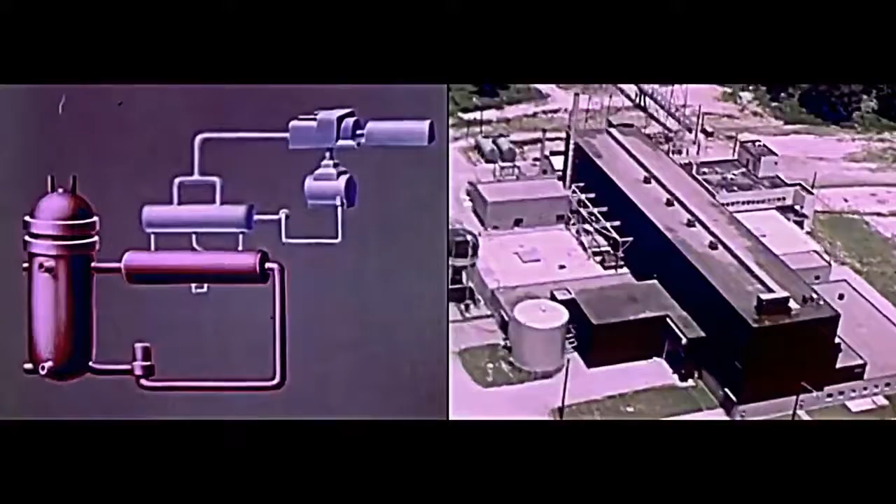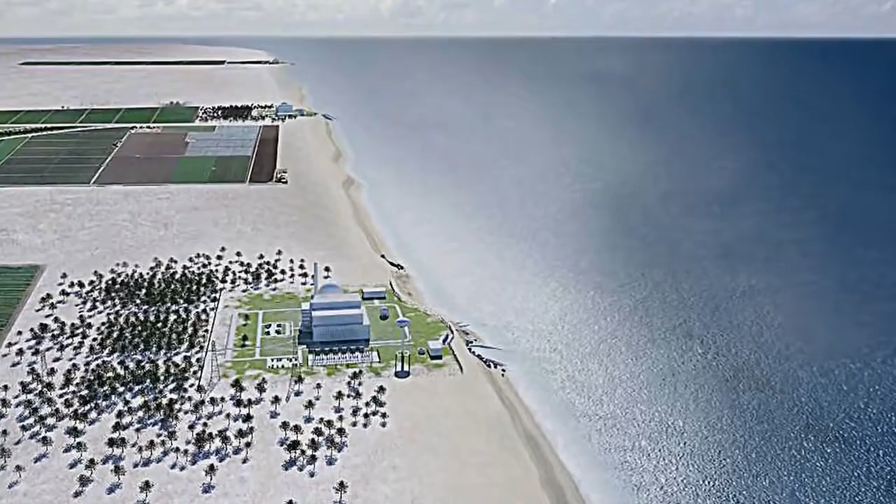It's just by dint of a solid fuel supply chain having gotten started that we don't have a molten salt supply chain in place. While molten salt reactors allow previously unattainable levels of passive safety, this does not mean that pressurized water reactors present any greater danger than coal, solar, wind, or natural gas.

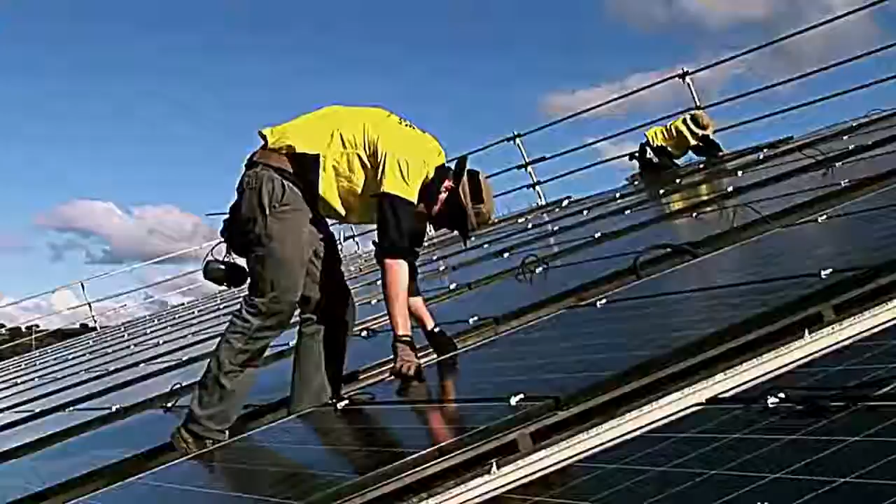Despite Three Mile Island, Chernobyl, and Fukushima, existing nuclear power is already the safest form of energy available to mankind. This is because every source of energy has risk associated with it. Molten salt reactors and other modern reactor designs such as the AP1000 minimize the impact of any error by improving passive safety mechanisms. Any incident at a newly constructed reactor is much less likely to disperse radioactive isotopes. But the key to reducing errors in the first place is having a well-regulated industry.

Hey, Barney. Yo. Open 14 and 15. You can't do that, Jack. Open them, Barney. Jack, you can't do it. The book says... Well, you can't do the book. We're almost up to the steam lines.

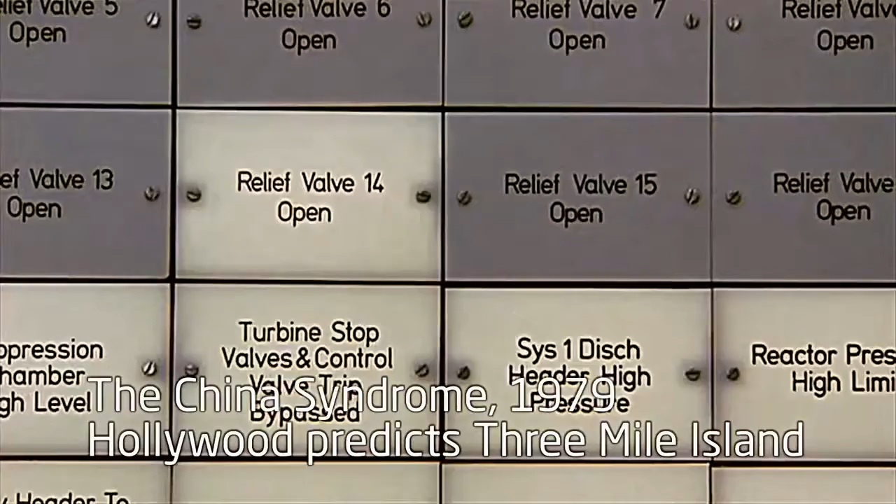It just might be a feed water leak. Which valve? Can't really tell. Shut the isolation valves, you're gonna need that feed water later. You want to go down there and do it by hand? Do it.

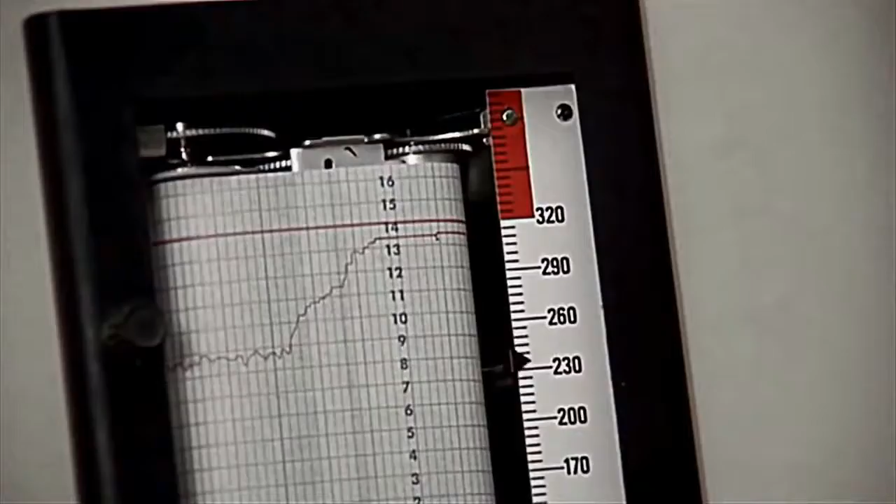God damn it! We'll probably never know the full extent of how badly Soviet nuclear power was managed. I sat before the world in Vienna and blamed those young men at the controls. I made no mention of the role I'd played in their ignorance. I did not speak out.

Valery Legasov's suicide caused shockwaves throughout the Soviet nuclear industry. Design flaws in the graphite tips of Chernobyl-type RBMK reactors were finally admitted to, and changes were hurriedly made.

But we do know that Japan's nuclear industry has seen a steady stream of fatalities. This does not happen in France. This does not happen in Germany. Over a 10-year period, from 2003 to 2012, United States nuclear power was responsible for a single fatality: a uranium miner who died when a support beam collapsed.

Because every single source of energy has caused at least one fatality during this period, and we know how much electricity was generated by each energy source, we can express how safe each form of energy is as a quantity of watt hours per human life. For nuclear power, because there was only a single fatality, we divide by 1: almost 8 million gigawatt hours of electricity per human fatality.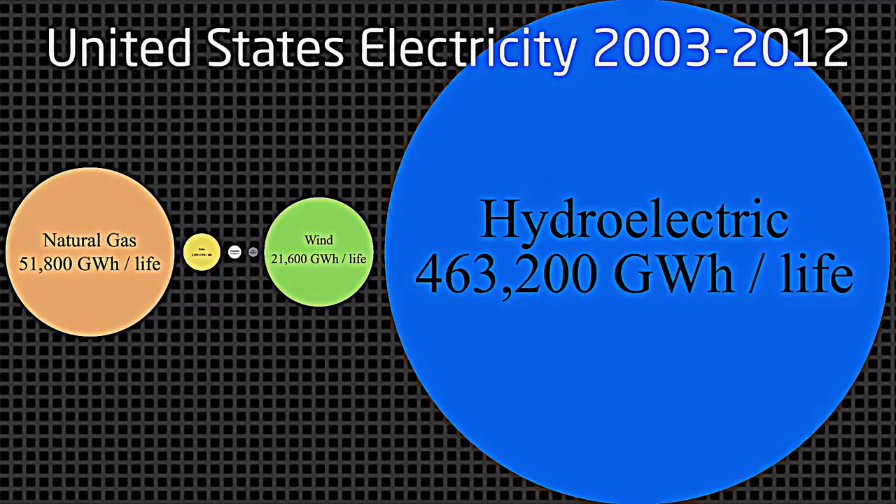Next is natural gas. We've all seen natural gas explosions on the news. Somewhere between 26 and 27 people were killed during that same 10-year period. It is a fractional number because the natural gas was dual use—only a portion of it was for generating electricity. Now that we're burning fuel, we have air pollution to consider as well. 144 fatalities can be reasonably associated with the pollution caused by burning natural gas over that same 10-year period. Even with the cleanest burning fuel, air pollution kills more people than explosions. Natural gas gives us about 52,000 gigawatt hours per human life.

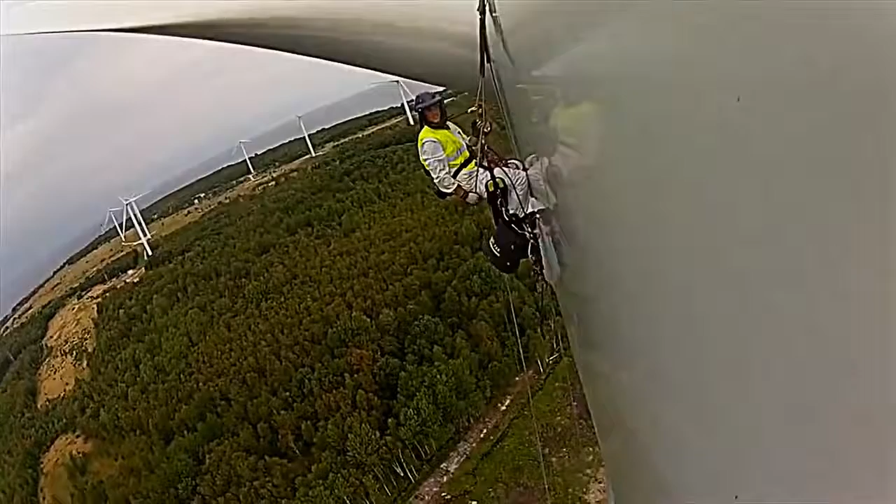The safest renewable is wind, about 21,600 gigawatt hours per life. Wind fatalities are due to maintenance. Just like nuclear power, this could easily go up or down depending on how the industry is regulated in the future. But there are a lot of turbines, all requiring regular maintenance, each one producing a moderate amount of electricity. To improve the watts-to-life ratio and try to make it as safe as nuclear power, it is reasonable to expect the cost of wind turbine maintenance to go up, driving up the cost of wind power. 27 people died maintaining wind turbines over that 10-year period. Natural gas comes out ahead of wind because it produced far more electricity.

Solar is 2,500 gigawatt hours per human life. There are a whole lot of rooftop solar panels, and each one only produces a tiny fraction of the energy that a wind turbine does. Of all renewable energies, photovoltaic solar power is the least competitive in terms of price, but it also offers the biggest opportunity for improvement if panels can be made more efficient. Such an improvement in panel efficiency would also improve solar's safety standing, since more watts could be generated for the same amount of maintenance.

In the United States, from 2003 to 2012, the average number of watts generated per fatality is 300 gigawatt hours per human life. How is our average so much lower than any number we've looked at so far? Because of coal. Let's not forget electricity produced by burning coal. Coal mining killed 298 Americans over 10 years. Coal mining fatalities dwarf all other forms of accidental death in the United States.

But the big numbers are in air pollution. In one decade, burning coal has killed over 130,000 Americans, largely due to the release of tiny solid particles that we inhale, causing respiratory illness. Burning coal also exposes us to mercury poisoning. This is how America's consumption of electricity kills people: by coal. Every other source of electricity is safer per watt.

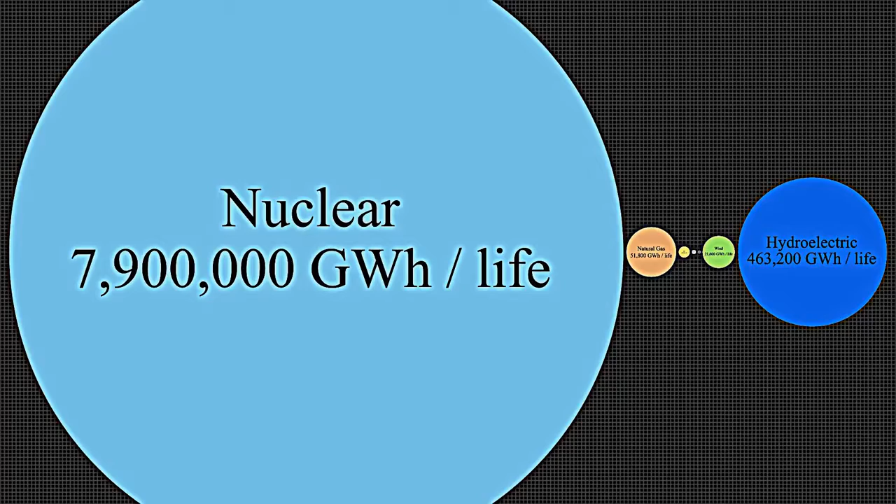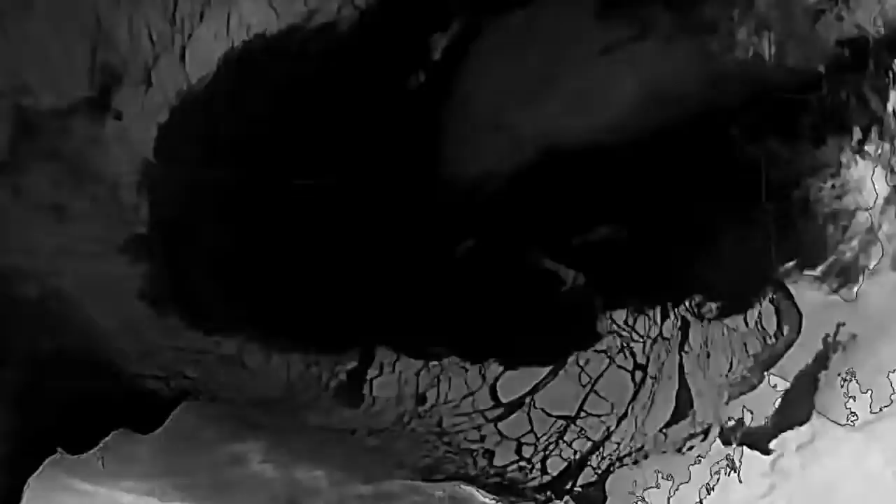On the other end of the spectrum, no other source of power has the potential to meet all of our electricity demand with such a small impact on human lives, disrupted ecosystems, and future costs projected from greenhouse gases being pumped into our atmosphere. Nuclear hardware is shielded from the degrading effects of sun, wind, and rain.

All safety systems are focused on a small area and a handful of highly trained individuals. Nuclear has the advantage that the amount of energy per atom is about a million times better than coal or natural gas. So you start with this huge advantage, and yet given the complexity of the plants and the things you have to do, you more than wipe out your million-for-one advantage.

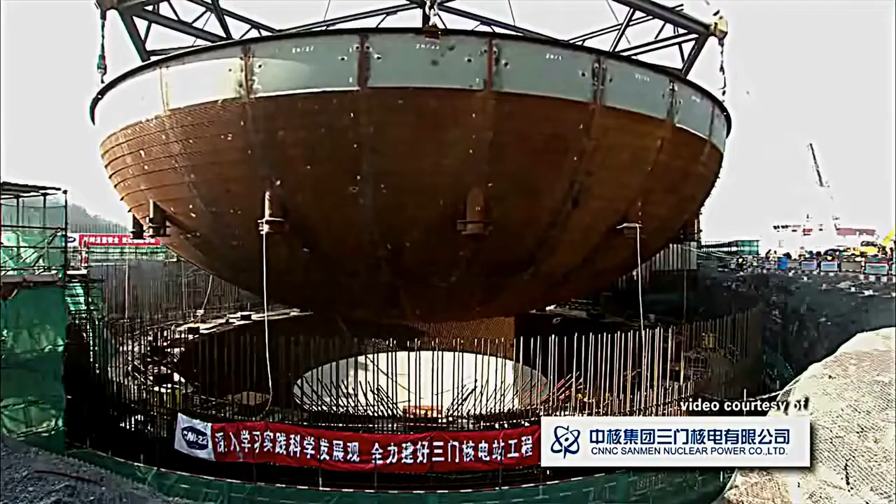Today's nuclear plants are fairly expensive, at least the way they're built outside of China. So they're pushing the state of the art, and they're standardizing designs and things like that. So nuclear is one of the directions that we should innovate in.

Nuclear innovation stopped in the 1970s. We basically have this sub-design thing that was put into Shippingport for the first power generator, and we basically built 400 of those that are all kind of custom, but not in any interesting way.

The reactors used to, in the United States, have like 40, 50% uptimes. I mean, they were horrible. They standardized everything they could - pumps, valves, motors. That's how crazily one-off these plants were. They would get custom nuts and bolts for the pressure vessels.

Part of that is due to Three Mile Island, because after Three Mile Island, they realized that training was not that good and was not uniform across the companies. It forced all the companies and utilities to get together to share their training and procedures. It made a huge difference. Three Mile Island - what an indictment of how poorly managed the industry was back then.

Choosing nuclear power does not guarantee safety. It is possible to make an unsafe reactor, to staff it with poorly trained individuals, and it is possible to respond to the release of radioactive isotopes by doing nothing at all to protect the public.

Well, the only equipment we have to measure it are the control room Geiger counters, and they're reading 3.6 roentgen per hour. Well, that's not that bad, is it? I mean, 3.6. But the scale only goes up to 3.6, and it's off that scale. It could be 3.6. Yes, it could be 3.6. Dyatlov, I have no intention of telling Moscow it's worse than it is, okay? If it says it's 3.6, it is 3.6.

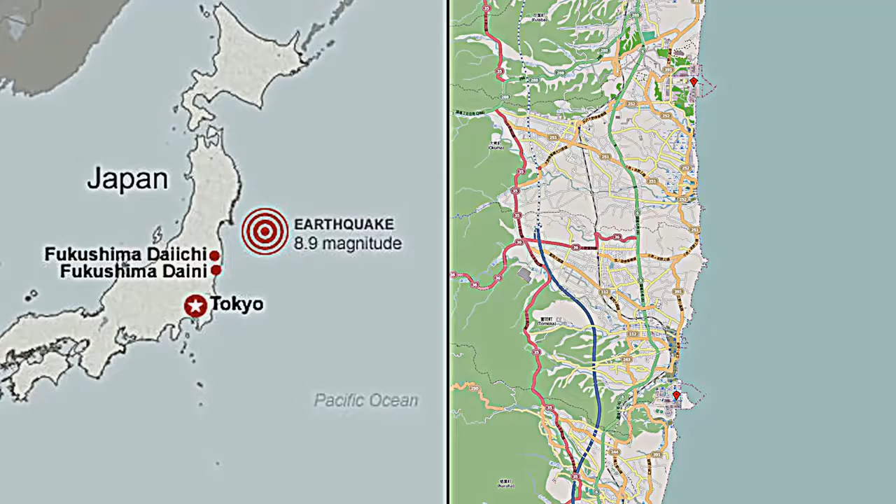The other five reactors in the Fukushima prefecture were built just a few years later, and all the reactors at Fukushima Daini - none of them had significant damage. We figured out how to prevent that problem sometime around 1971, 72. The one thing that the Japanese didn't do was go back and fix the early systems, because they thought, we've operated the plants for 40 years and it's not been a problem before.

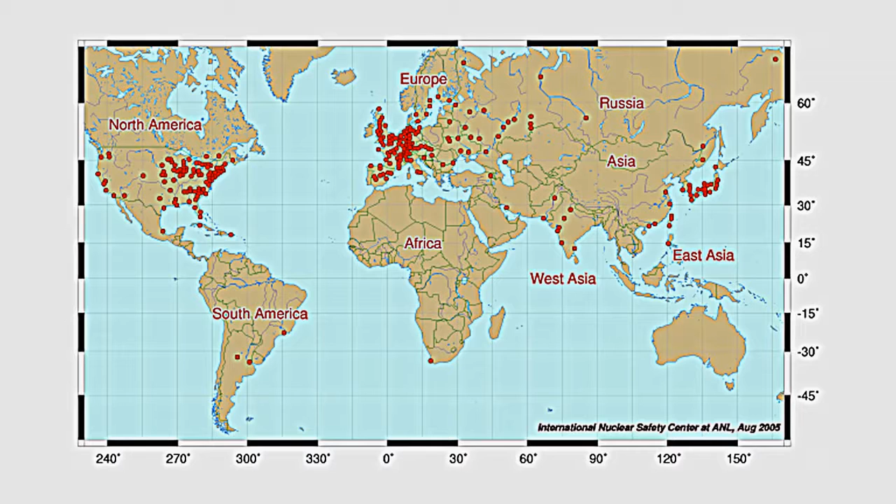We have 3 standout examples of what not to do, and decades of safe operational experience from hundreds of nuclear reactors around the globe to learn from as well. What choices can we make today so that nuclear power can be even safer?

Very few people understand all the options that are available in nuclear energy. It's a complicated subject, a subject that is actually quite new. The first chain reaction experiment was December of 1942. My mother was a teenager in 1942. She's still alive and kicking.

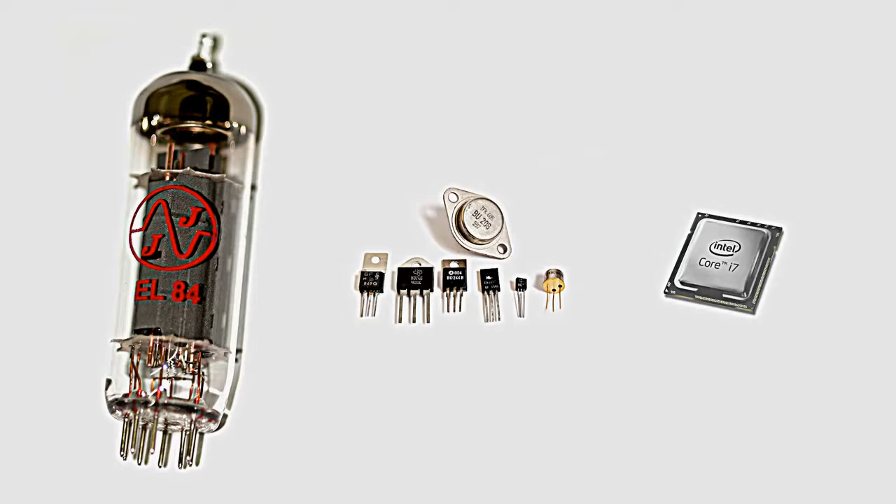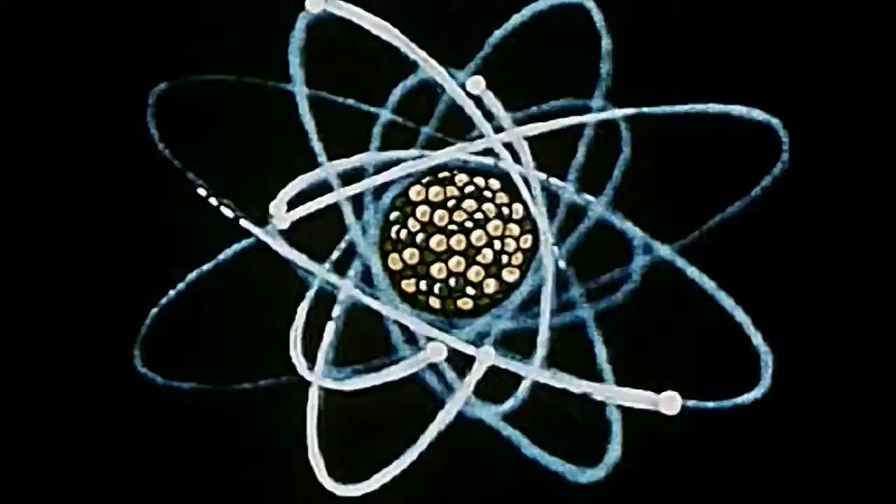This is the only part of the energy business that has anything close to a Moore's Law capability for improvement. We're still at the very early stages of figuring out how best to put that energy inside the atomic nucleus to use.

At the time when society had its most optimistic view of science, it had the view that if that was the form it took, then it must be the right form. But we still have this view that society can't shape technology, that the form the technology takes is the form we must accept. What science and technology gives you is a range of possibilities, and those possibilities can take you in any number of directions.

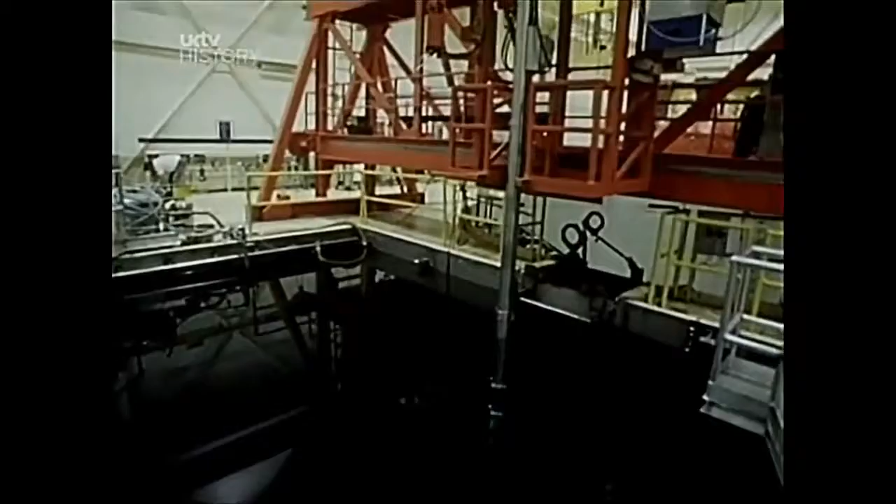I'm Bert Wolfe. I headed General Electric's Peaceful Nuclear Power Program. General Electric and Westinghouse took the simplest form of nuclear reactor, originally designed for submarines, and redesigned it on a gigantic scale, and offered it to power companies at knockdown prices.

We would sell one at a time, and each time we sold one, we'd have a celebration. I can recall when we'd have meetings and someone would come in and say, we sold a plant to somebody, and we'd all stand up and shake hands and go out for lunch and have wine and toast each other. It was a great celebration. So we began selling these by the tens, so it became a real business.

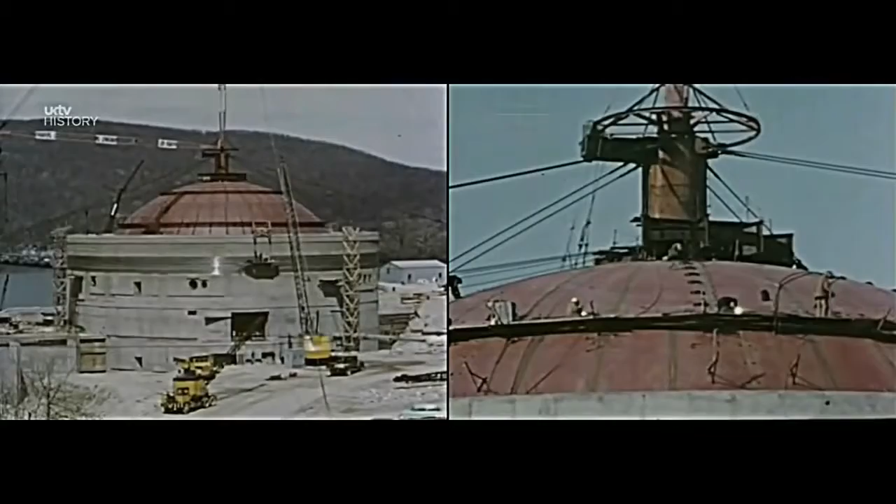The history of nuclear power is a history of political, economic and social decisions being made about a technology. And the key decisions weren't made by the technologists. They were done in the business realm.